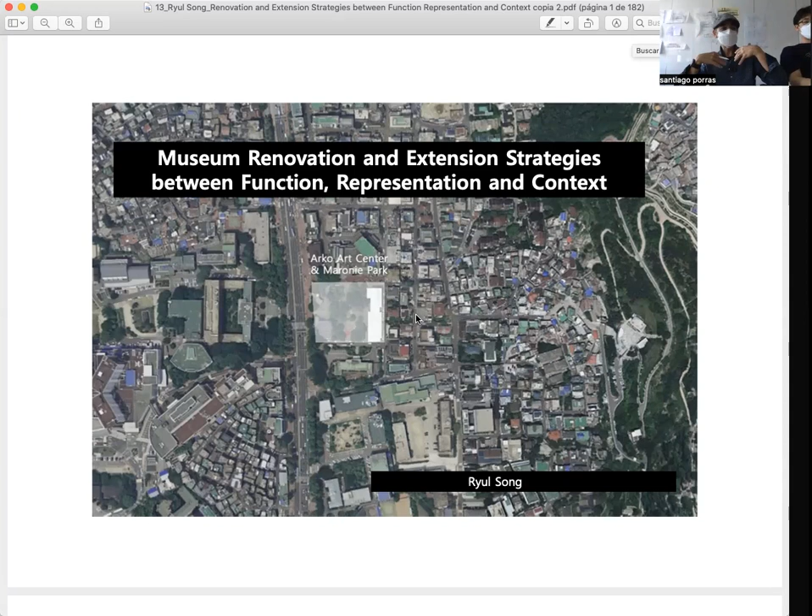So today in building systems, we have the lecture on acoustics, and we had to lock out the microphone of the classroom because it was terrible. It was kind of a big echo and was very much a problem, so I had to go with just plain voice.

This is Professor Ryul Song's lecture. It's the same one from previous years, but we have permission, and it has quite interesting case studies that we will see. I skipped the part in which she analyzed the Arko building because it is not our purpose.

She started with one movie we commented on in class also, Mon Oncle, from 1958, which you see on the right. It's a movie you can find on YouTube or almost anywhere. It's quite interesting because it was made at the moment when France, Paris, was rebuilding from the war, and it's kind of a field of experience for modern architecture. As we commented before, it's very critical of modern architecture.

So this is kind of a comedy, right? But it has a very patent critique of that kind of dream to be very mechanical and modern society. The protagonist is the uncle, the guy with the pipe, and the nephew, who is the son of a rich man making a modern house. Jacques Tati is actually a Russian-French director, so maybe it's Tatischeff originally.

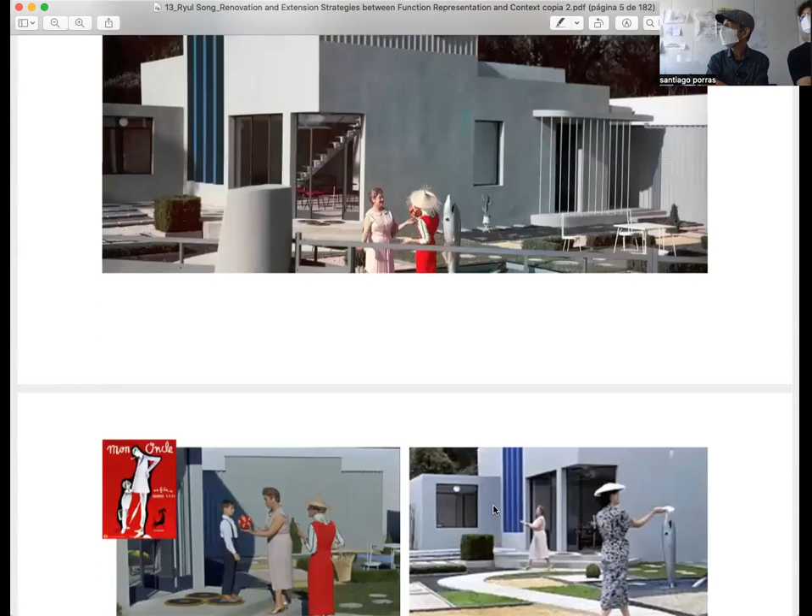And this is the happy couple, right? The housewife and the successful businessman prototype. And as we commented, this is the scene we saw in class, these two ladies crossing the garden to say hello. Yeah, this scene here.

And all the spaces, the life, is very artificial. There's a specific spot in the garden to enjoy the sunshine and have a cup, or the automatic door of the parking, which shuts off, and the dog stays there while the couple look through the windows for somebody to open it again because it's automatic. The dog only has to cross the photoelectric cell, but he never goes there. It's kind of dystopic.

Or the obsession for hygiene, for cleanliness, in which the mom puts on gloves to clean her boy after he's been playing with his friends. If he were eating dirty, cheap street food, they would find out. Then at home, everything is totally sterilized to avoid bacteria. Of course, he has no taste for it, so the kitchen is more like a laboratory than a kitchen.

But what he really enjoys is just going around with his uncle, who has a lot of style. And the old house is totally the opposite, right? You meet the neighbors whenever you go in or out, you meet somebody, you speak. This is something which is kind of lost in our projects - this space from the street to the house, even a tiny courtyard, this place for stopping and meeting.

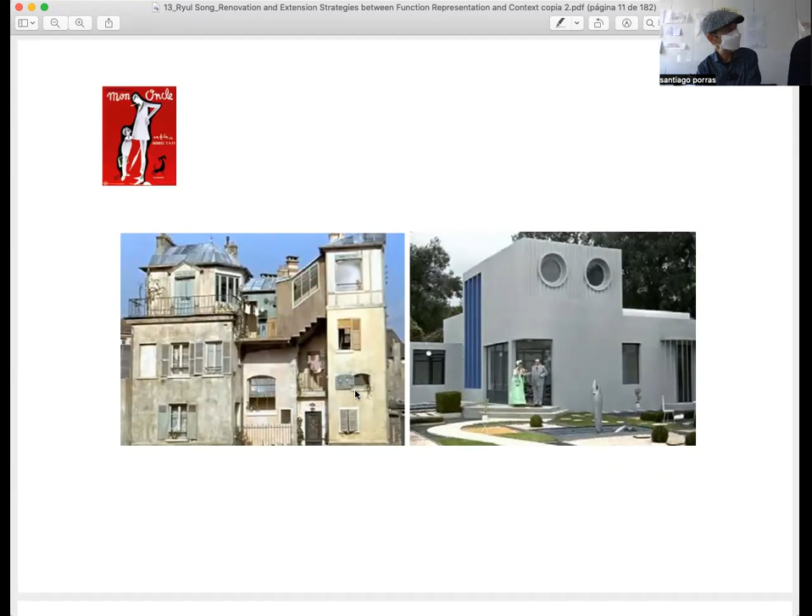And this is the confrontation, right? The old guy with the modern social guy, and the disappearing traditional city against the modern but more impersonal city.

Now let's see a few examples from extensions and reuses. The first one is quite interesting. The idea of the city is that the city itself is a scape, right? It's not a natural landscape, but an urban landscape you are really in.

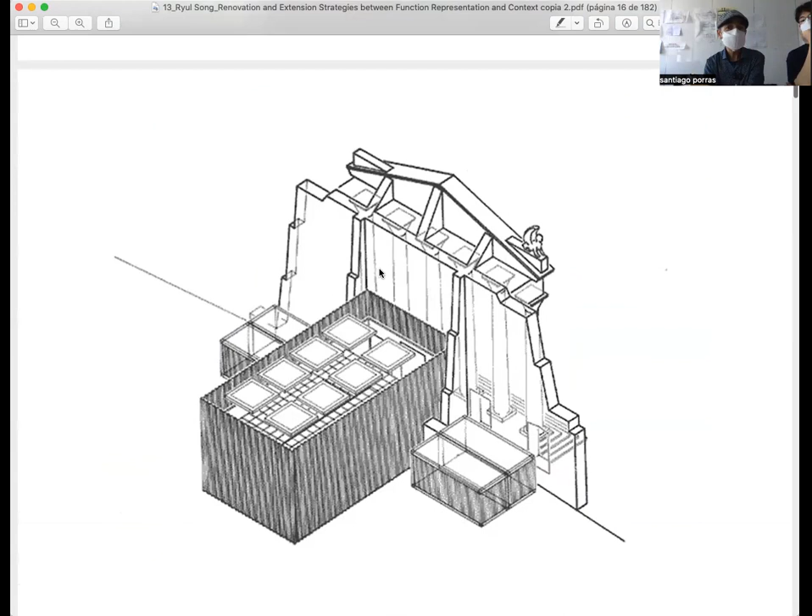This has to do with our requirement to deal with the structures. Facade alone doesn't stand, needs some kind of structural reinforcement so it stands up. Well, this is how it stands in the street. So the context is almost no context. So this is like a very rhetoric in that sense.

It's very much in the Venturi's. We spoke about Venturi before, right? We spoke Robert Venturi, the decorated shed. So he was defending a possibility of making architecture in which you have a plain building which has a sign on top telling, I am a monument. Right, so it's a very famous illustration by Venturi. This is doing the opposite, not telling things, but doing that with a real representational element.

This section, again, there's like a real construction project with all dimensions, the containers to get the functional elements, which is the office and the toilet, a little less, and the really minimalistic exhibition space.

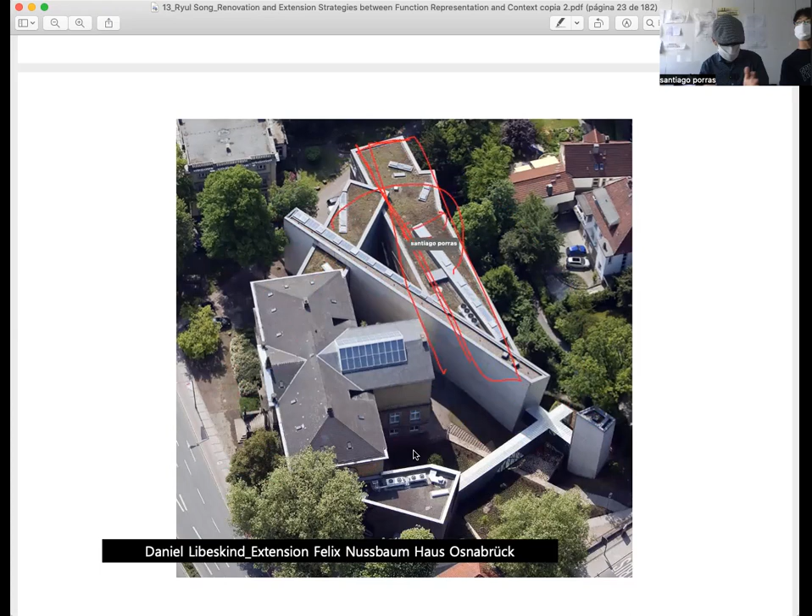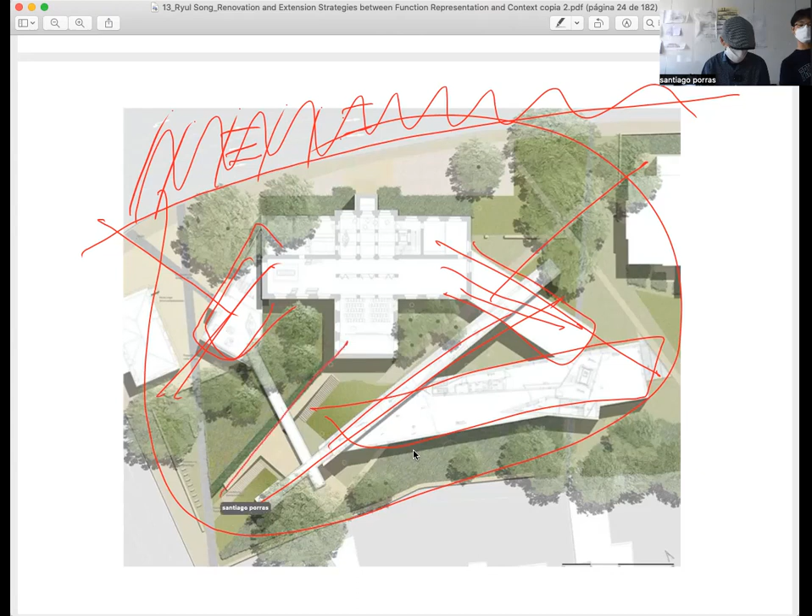And here's when we understand a little bit why things are done like this, right? So like secondary facade to the street, another element to the street. This is a little bit of asymmetry we were criticizing with the sand dune before, but the elements are so different, and then you have many more elements to counterbalance that movement. That's not more asymmetrical achievement, but a set of elements creating a whole, right? And landscape completes this kind of connections or divisions and movement lines.

You see also that the drawing is very subtle, but some of the gestures just go inside the other buildings and become something different, right? So this becomes like one element could be one full building with a courtyard inside, right? Which is following the other one. And then this still could be another building which relates to this other garden. So there is much more elaboration than just a random juxtaposition of boxes around the site.

I wish the conditions weren't so strict, but I wish there was a bit more interaction with the existing building, because this cut is too sharp. This would have worked much better if there was something happening there in which the extension and the existing are a bit more closely related. But probably the conditions were quite strict in this case.

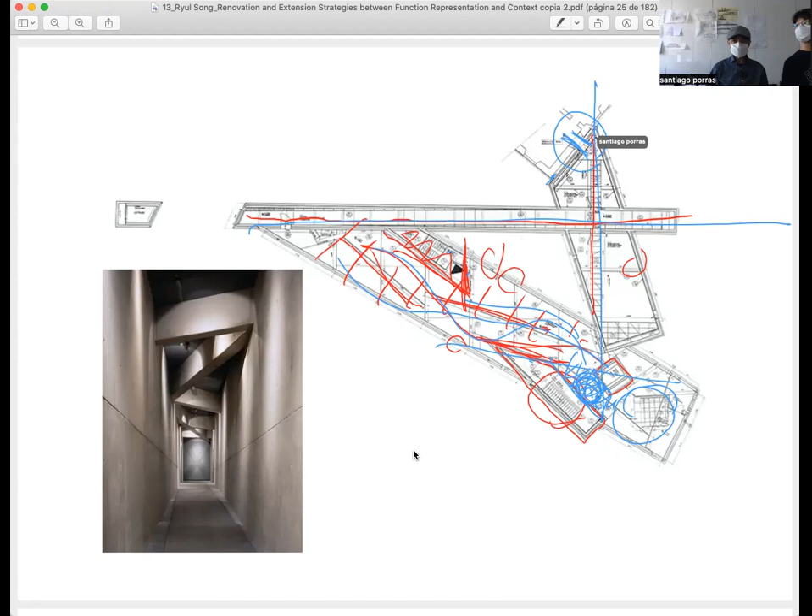And this is the connection with the existing building, which is just putting the doors and one wall against the other. I don't know if we can see this in greater detail, but what we commented - see how there is always a small in-between space between the existing and the connection, and almost a tunnel which goes inside the window. So really the existing building doesn't lose its integrity. It's not like sticking one building straight to the other.

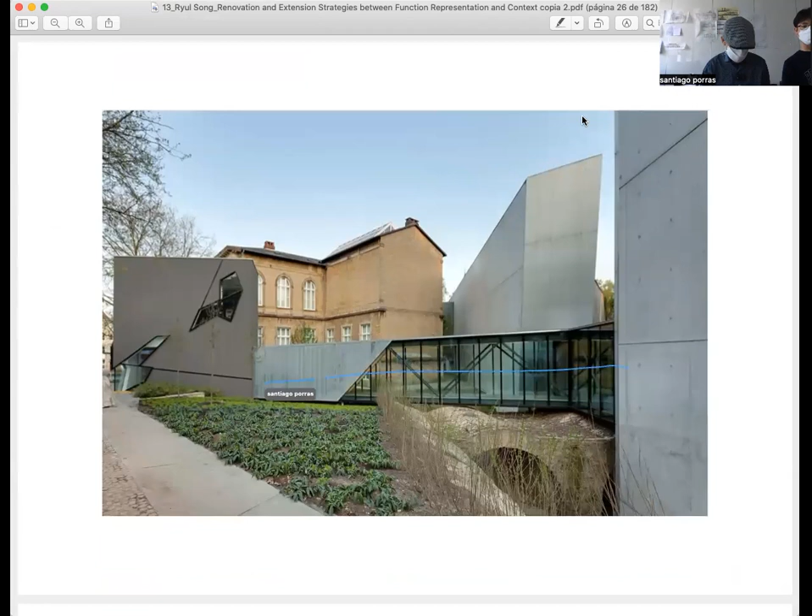All these are the spaces you get inside. This is the long corridor, and this is exterior. So you see some element is just very light. And this is so interesting because in the plan we cannot see it, but if we see the reality, we have very heavy, very solid elements and very light, almost immaterial elements. And this helps also to give some balance to the site. You have some kind of suggestion of what you can see through.

Interestingly, this glass is over kind of ground water running around, some stream under the building. So the view and the flow of water are relating. The building, actually, all building is not great, nothing, but...

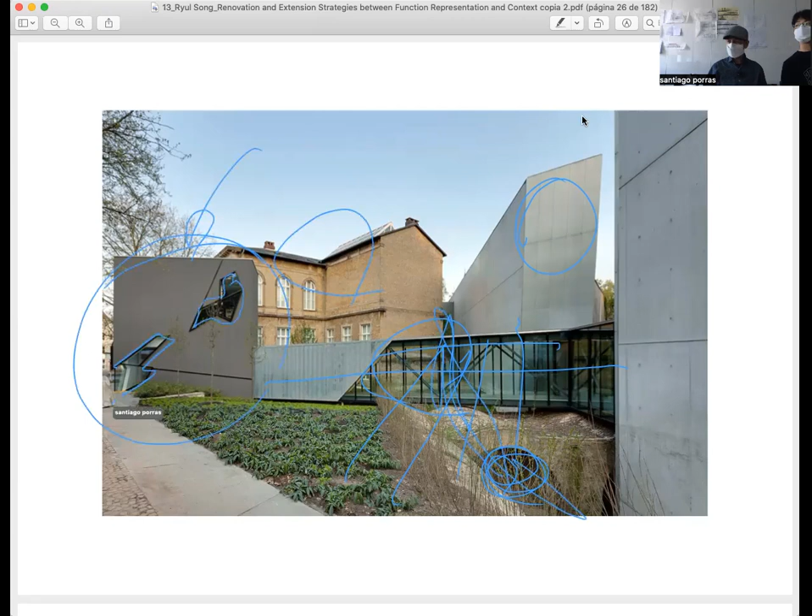Obviously it's not touched, the design I'm not so sure. This piece in the front makes sense at this time, but it's a little bit... well, I'm not sure this is the best of the design. It's obviously getting the geometry you have in plan and putting it in elevation, finding some lines, but at points I doubt it has the strength you see in plan. It's a little bit overdesigned.

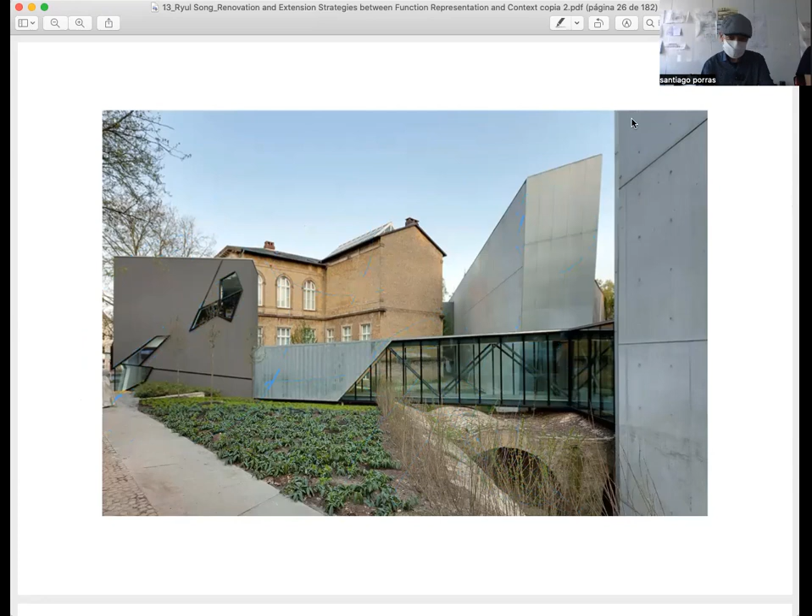Facades are terribly difficult, and it's very easy to be overdoing or underdoing in some areas. I cannot say because I wasn't there, but probably this is the hand of some intern or staff working in the office. The project is very strong and very clear, and this facade is a little bit too much - that specific window. This border is more interesting, but well, that's my opinion.

This is more detail which insists on the importance, the difficulty of connecting new and old in some way. So we should reach, in part of the building, this level of definition, at least by the final stage. Not everywhere because it takes a lot of time, but we should be aware of how thick the elements are, how the structure is, how it moves around, how thin the windows are and where they're positioned against the original ones and so on.

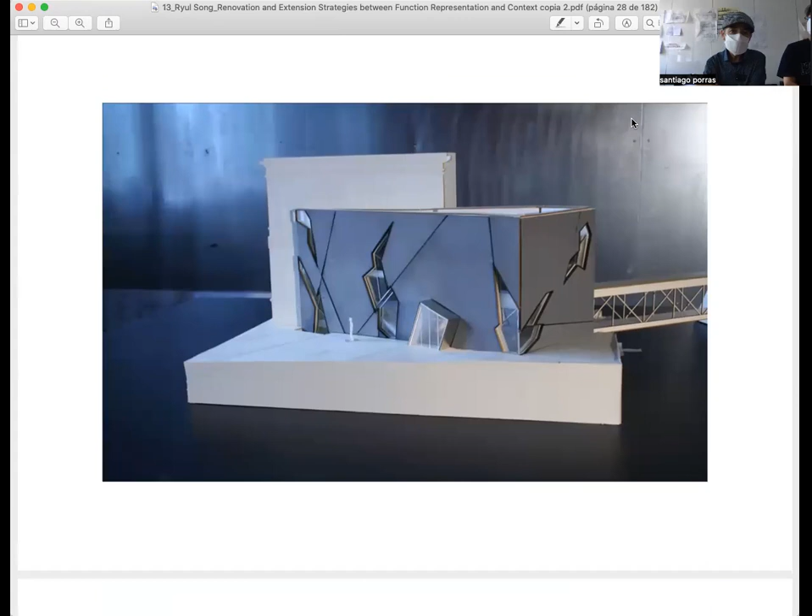Okay, and this is the model. This is where I see like a too much overdoing in the window design of the facade. But okay, it happens only in one building, so it's not kind of repeating.

Yeah, this is interesting, the Enric Miralles. This is the architect who died too young because he worked too much. So do not overwork.

Professor Song worked in his office. She studied with him, so she knows very well.

Miralles is very unique, it's very hard to classify. He's more of an architect than a Libeskind. Libeskind is kind of a sculpture artist, a designer, but Miralles is a real full architect. So all the construction details, the structure, everything is studied in his office. It's not outsourced like it happens with other buildings. Almost everything is tested, and it's very much architectural, very much tectonic. I would classify him more as organic than as a deconstructivist.

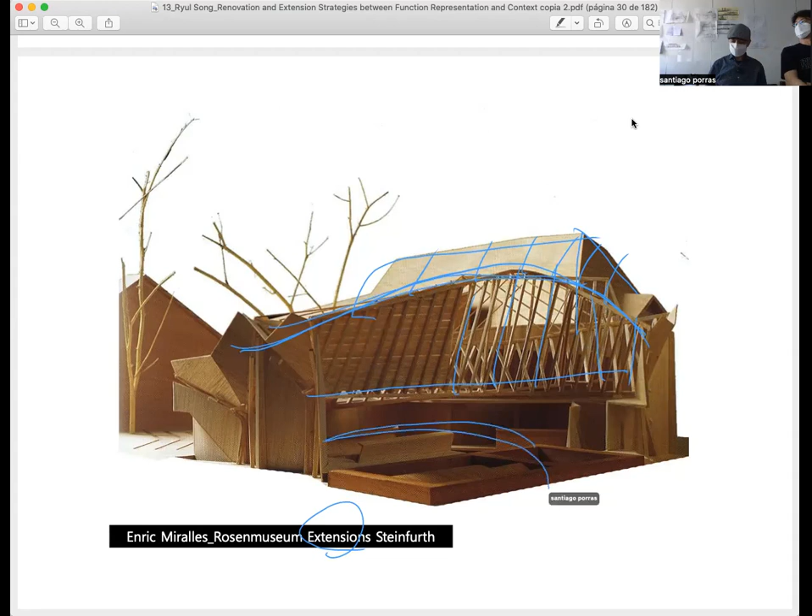This is the plans. See how the existing building, again, is very plain architecture. There's nothing great, right? And the extension is not filling the gap, but just creating some kind of flow between buildings. It's like air or water flowing through, which creates the spaces for the administration or the access and the exhibition elements, which will be piling next to the existing building, creating enough space for those exhibitions. Those two are rotated.

Another interesting thing: the extension is very strong formally, but fits quite well in image and in plan. It's clearly secondary, clearly an extension of the main building. And even if there's some kind of asymmetry, the logic is very easy to follow, at least I think so.

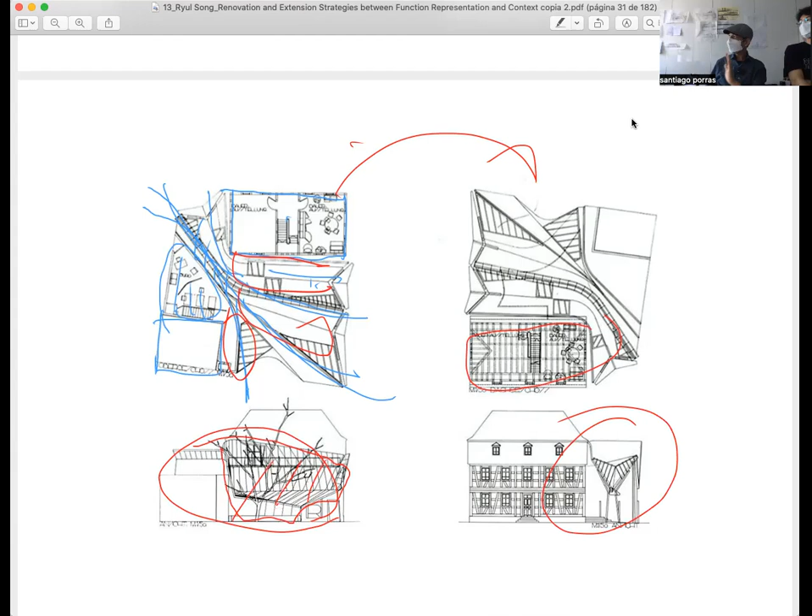It's not easy to achieve this point, because this is already quite a mature Miralles, so he had a lot of experience here.

Well, this is the detail of the plan. When you do this kind of very organic plans, see again the opportunity to make something which is formally recognizable, so you understand you are in a clear space, to leave some space between new and old. Well, this is all new, right?

And then to put furniture and other elements very much following that flow. Very often in this kind of project, furniture and counters really break the idea because they have totally different geometry. A very intelligent way to connect a stair, for example, to give some space to this corner, so we always have minimum space to move around. A good corner was hard also to make, but connects very well this kind of movement around the building.

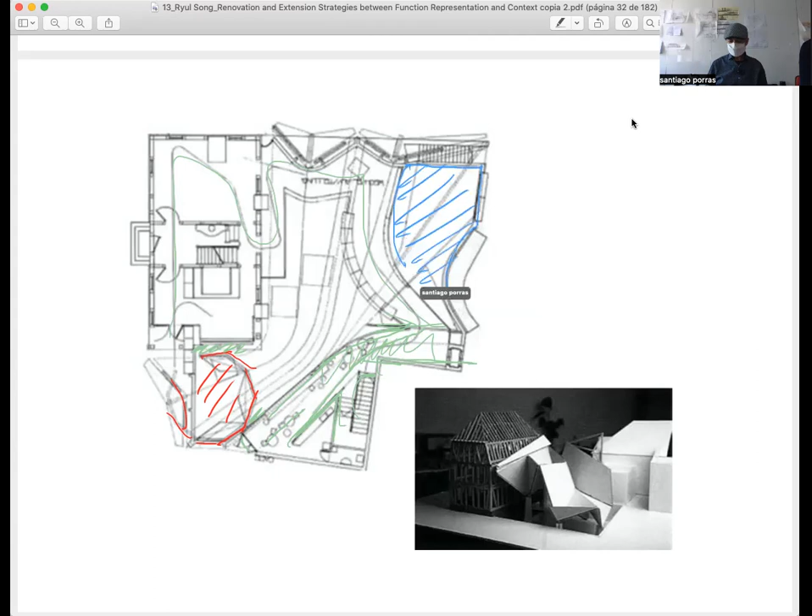And then the spaces created are quite logical. It's not useless exhibition rooms, they are all well organized, with good proportion, and easy to understand as independent rooms, the same as the circulation is easy to understand as circulation.

If you try to do this kind of architecture, which is possible, it takes a lot of work. It's important you still are able to recognize the architectural space within the roof, the structure, the movement element, the rooms, no matter how free you are in the definition. I think a great part of the success of Miralles comes from this being very, very architectural. Whereas Libeskind, well, that project was a good project, but it was much more abstract, more making a sculpture and putting it on the scale of architecture.

Well, this is the model. You don't need to complicate so much, but there is obviously a fascination with this wooden structure and this kind of reinterpretation, a more free way, more like dissolving into something more immaterial towards the forest or the trees.

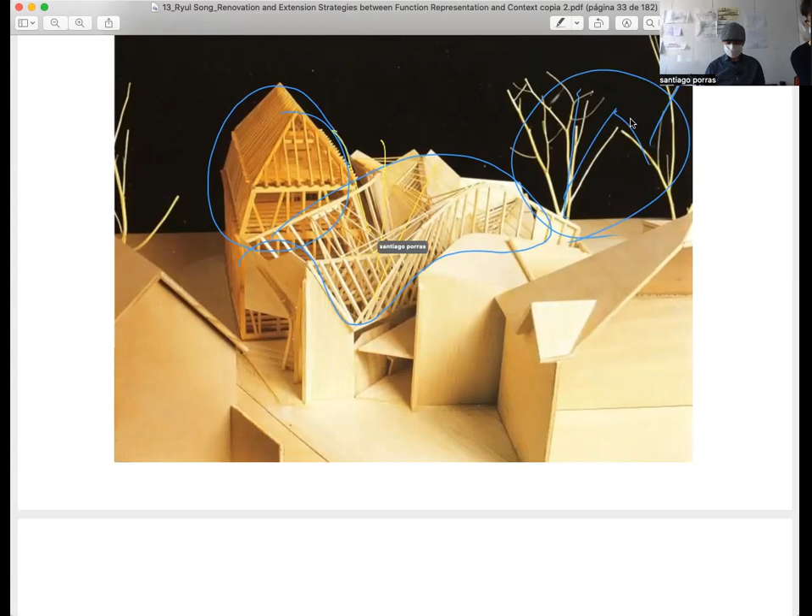And it is important that trees are here because they are also part of the composition. If you see, this roof is kind of following also the logic of the trees behind. But still, they are not an imitation of nature. They have some kind of connection of opening instead of being just a conventional shelter.

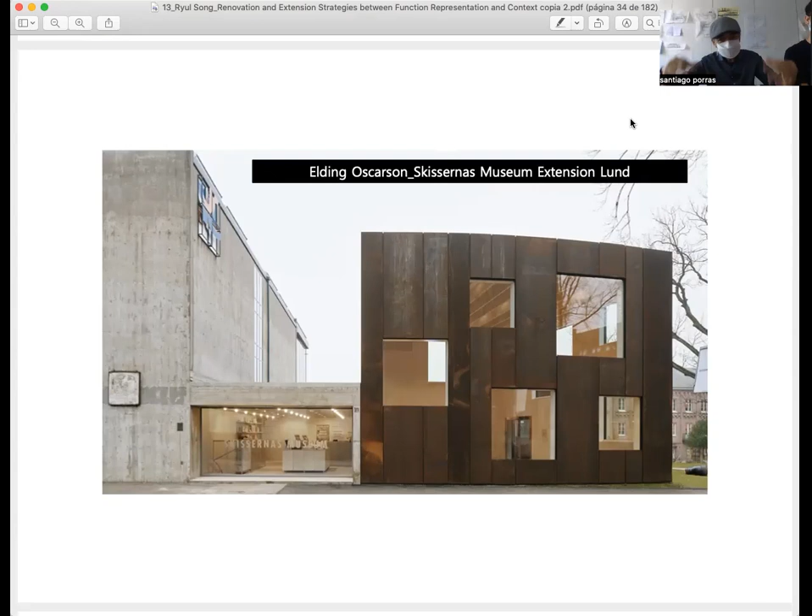Well, it has many readings. This is the Elding Oscarson, the Skissernas Museum extension in Lund. This is a bit more quiet, a bit more down to earth, more like a formal architect construction. This is, of course, one composition which has been repeated over and over - this kind of box with windows, playing with the square shape and the randomness. You can see it in SANAA and many others before, right? But still, this is one element which contrasts with the plainness, the almost industrial character of the rest of the building.

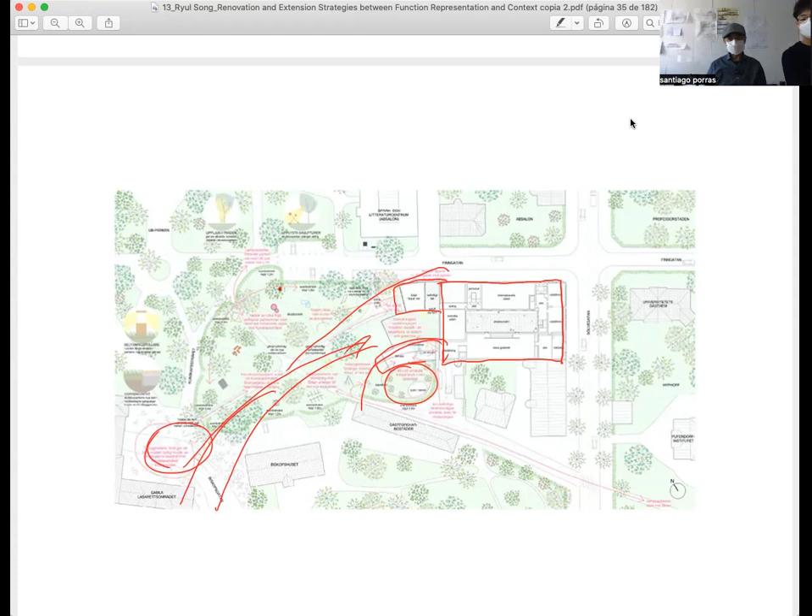What is interesting here, we have a very solid building, and the extensions are like trying to connect to the garden. It's like following this kind of movement towards shifting the center of gravity and ignoring a little bit the other pre-existences there, with the green and the access having a very soft connection with the courtyard inside.

So this is really simple, but very effective. Sometimes we don't need to complicate too much, right? And I think this project, the strongest part is this connection of the garden and the interior courtyard of the building, from which we will understand how all the exhibition spaces are done. I think this is a museum. You see the drawing, so you have clearly one central space and then the courtyard and so on.

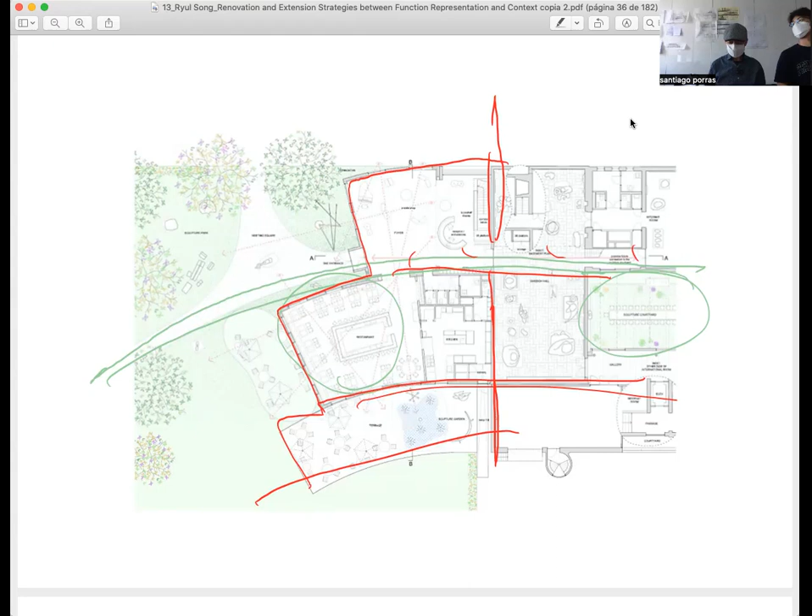The access is a little bit tangential, but this is one trick we have seen very often in recent days. And then the building articulates slowly towards the park. The line is very clear, but still there's some kind of continuity of movement and space design. And this kind of atrium connects to the lobby and the courtyard on the other side - there's small gestures and things going around, which makes sense in the context.

And you see a lot of arrows. This is also planning to have this kind of visual connection to places of the building, but also to the exterior landscape. So when you can see the trees, we can see Bukhansan, or we can see somewhere, you have to really demonstrate you can see it. So you can draw the mountain or the building you see as a reference and express it. Draw it, don't say it, okay? Because if you say it, we don't have the image of it.

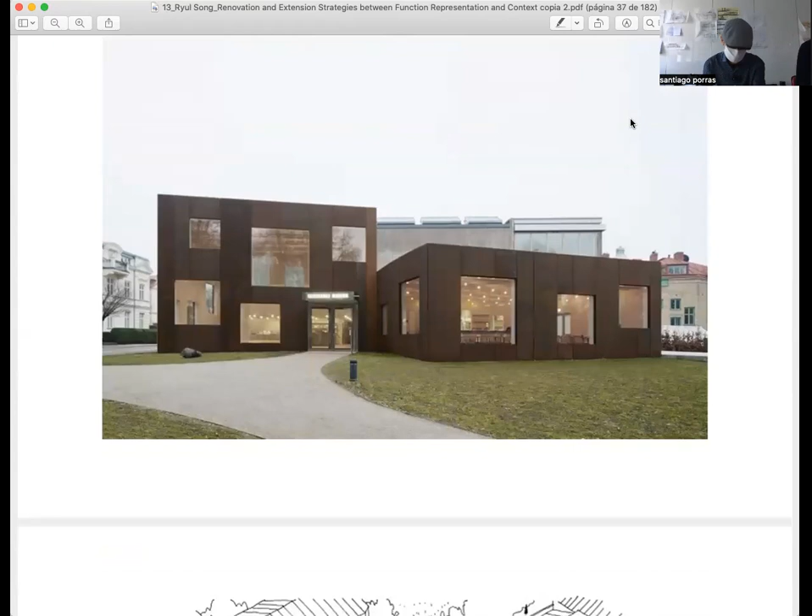What's the extension? You see the character is very different, much more relaxed, not so monumental, but still it has the character of public space. So this entrance, curiously, the door is the size of a window - this is a tiny door for a museum, the smallest you will do in this kind of building. And I see it working because this really shows itself as an extension, as a secondary building, not as the main building itself.

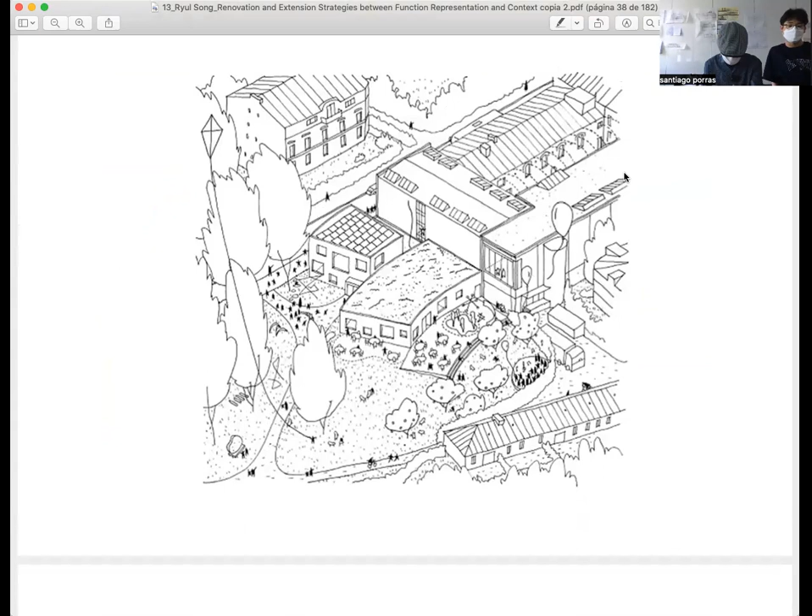Well, nice three-dimensional render. Also, an important thing is the clear inclusion of all the context in the intent, in the design. Something you are trying to do - well, this is not a stage, but many of you are trying to do an external stage. In this case, this fits very naturally in the diagram. It's in the perfect place. It is open, but still quiet. So you could feel one stage - well, this is not a stage, but a stage could work there. It's like a place for staying, while movement is more really through the park, around one tree and so on.

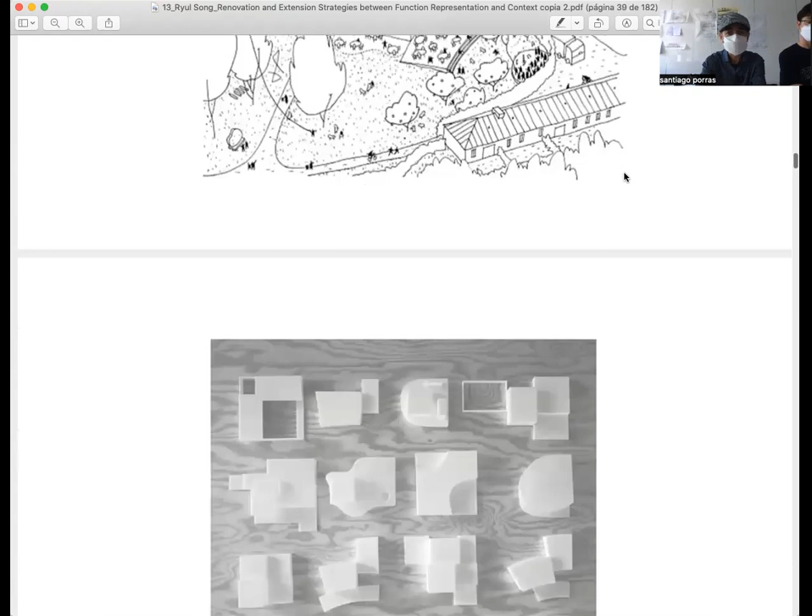You don't need to make a hyper-realistic 3D render to show one idea. Sometimes it's better to be more simple and tell a clear story without losing so much time with the details. Well, this is the massings - I will pass over it. And then the extension with existing buildings, in which again the thing is very plain. You put glass between the existing and the extension, and then you create something totally new with another intention.

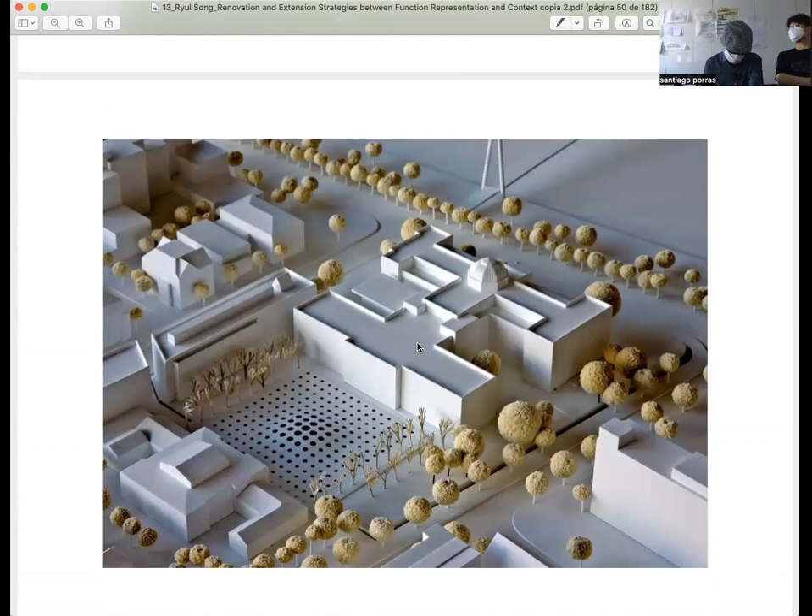One thing which is interesting is this side extension, this kind of diagonal cut, just to point to one open space. Those gestures always have some motivation—it's not something instantly thought.

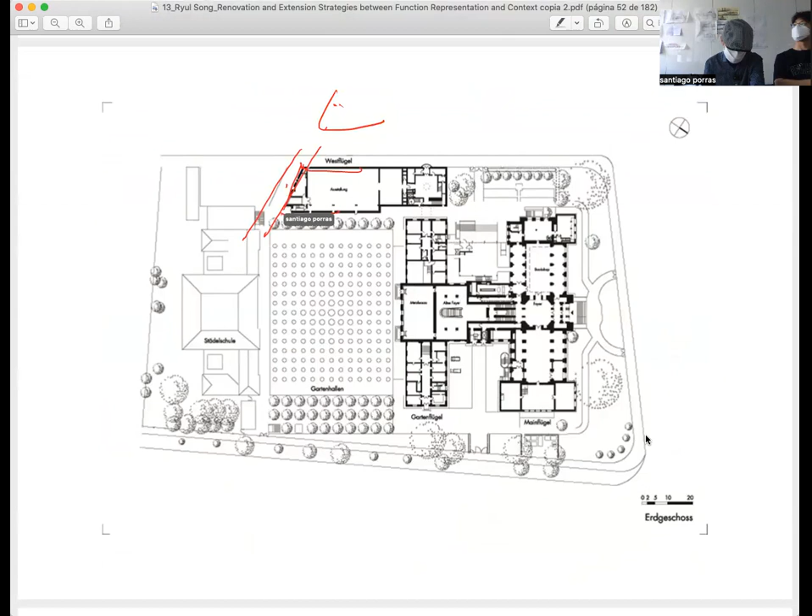The plan is interesting—you see again this cut here. You understand it with the context, right? If we see this alone, it's not clear why you need exactly this angle. But in the model we saw there's an open space there where you can see this garden, and you can see the other garden from the building.

See also how the extension is not as clearly defined as in Moneo, which we saw on Tuesday, but there's this kind of hinge element which at least formally connects the existing building with the extension, with a lobby in between. So it's kind of an element which allows for stopping and rotating to the other side. And of course, we have the original building, the lobby, this kind of backbone, and so on.

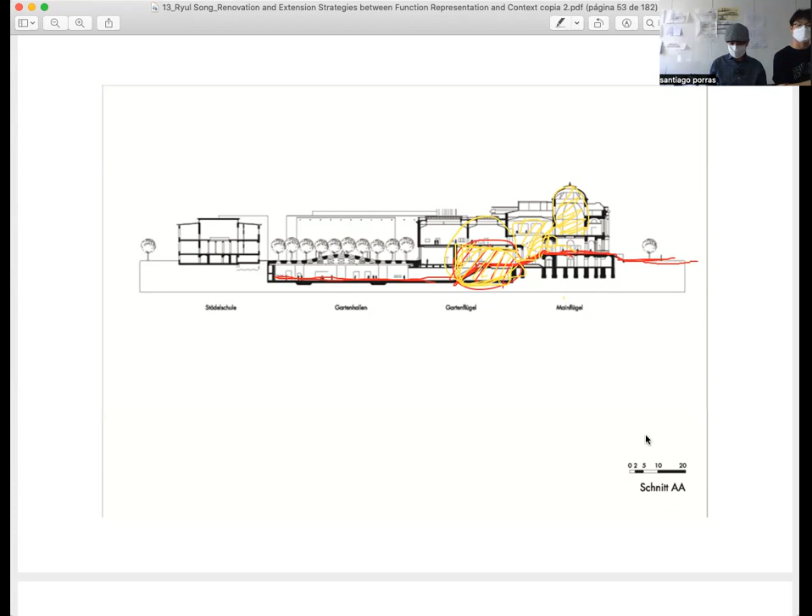And then the underground is one single space. When it is divided with walls, which you need for the museum, it loses a little bit of the attractiveness—this should have been like a small sports court or an indoor swimming pool more than an exhibition space.

Nice as it is, well, this is the stair. It should be like a really inspiring, pleasant stair with a lobby big enough to inspire you going underground. But as a museum, well, it's not criticizing it, it is a museum—but probably this space is too nice to be divided by exhibition panels.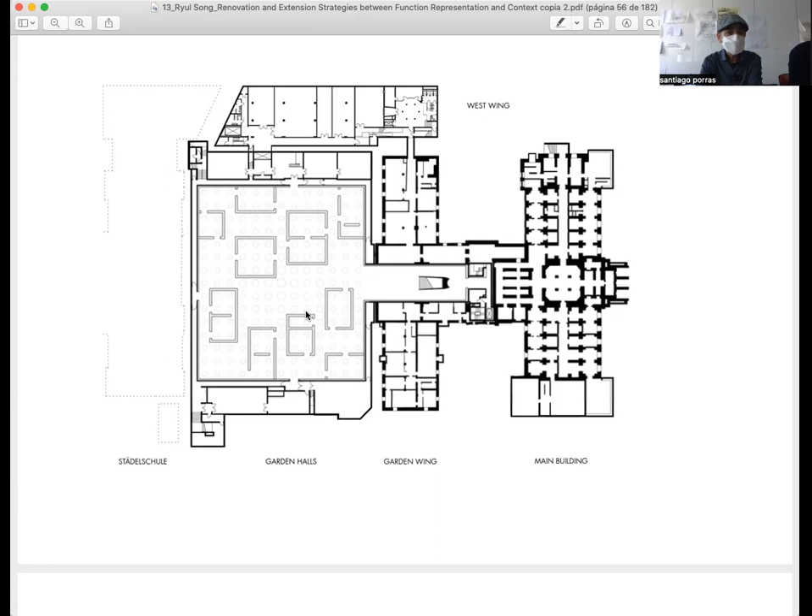So the plan, actually the plan is very good. The scale of the exhibition elements and the spaces in between is very well balanced. Even the logic of going around in diagonal movement can surely be changed temporarily with different exhibitions. So this is a good plan for an exhibition, but...

This space being unified and used only at once would have been great. There's a detail, so the space is nice.

Zumthor's Kolumba Museum is one of the most popular case studies we have. We have a huge lot of slides, so we're at 59 of 182, so we cannot see so much detail. But what is interesting here is the apparent simplicity of the whole idea of the building, combined with a very sophisticated study of materials, light, circulation, and the spaces which are created.

This is Mr. Zumthor's work, and this is the building. Actually, if you don't go to the site, it's very hard to appreciate, because it looks like a very massive, bulky, and kind of industrial structure. But it is mostly the ruins of a church, as happened with many buildings destroyed after the war, with a new building at the top.

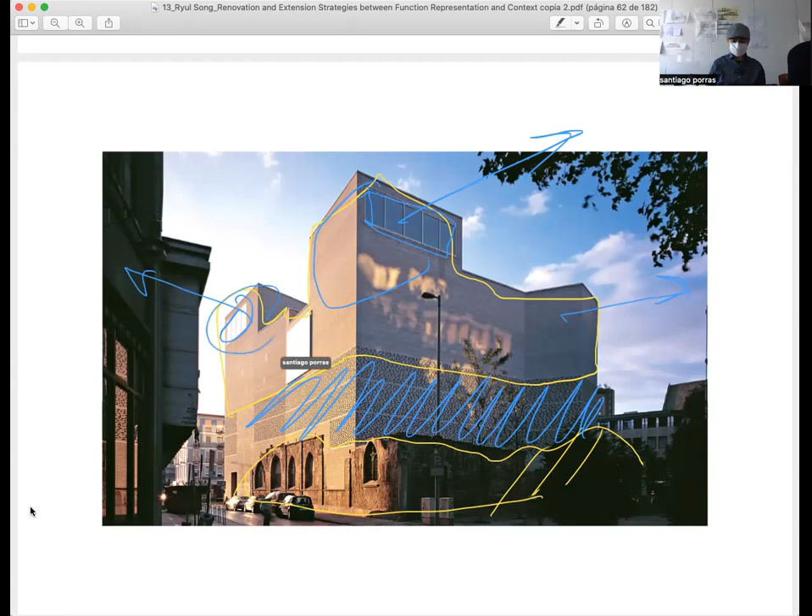So this is actually not such a massive building, with some in-between space which is just a void. The atrium we see very often between the original and extension, but in this case it's done vertically, which I think is the originality and strength of this project. The windows are purposely very industrial and personal, like big rooms looking for views in different directions, and it's so well expressed. It's like several heads looking around, like surveillance towers.

This is the original church, the destruction, then how it was used. Actually, this was one extension, which would also be an interesting case study. This is Gottfried Böhm, who we saw before. Böhm did many churches, and he rebuilt a small chapel, working with the ruins to make a kind of romantic small church within the ruins. Zumthor just kept all the layers of history in the extension he did later.

This is the huge Cologne Cathedral we saw the other day. This is one of the models - I don't think this is the final one. I think these are different proposals from the competition, not Zumthor's. But there was difficulty making an addition and keeping the ruins.

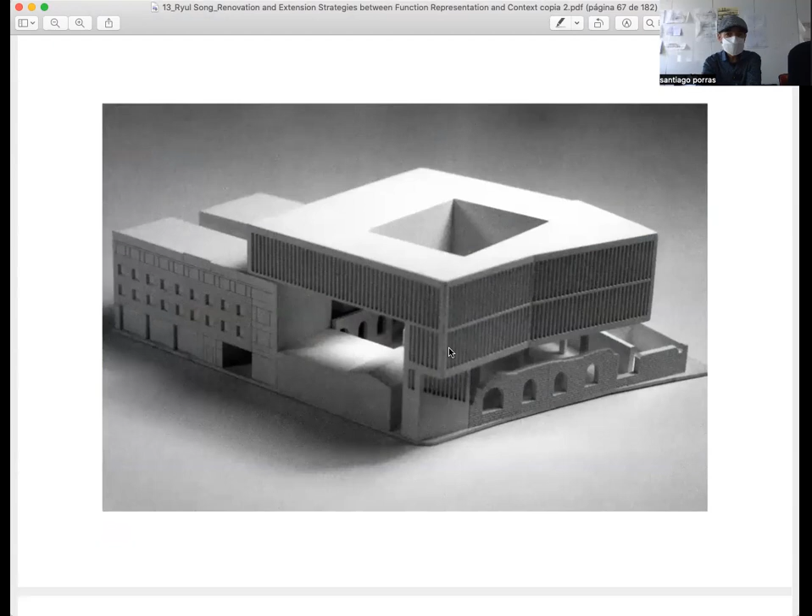This is surely another element of the competition. Very nice building with a very clear division between new and old. But probably Zumthor was the most radical, creating a unity between the new and old, being more radical but still following this idea of creating a layer in between - not being as obvious as the other proposals.

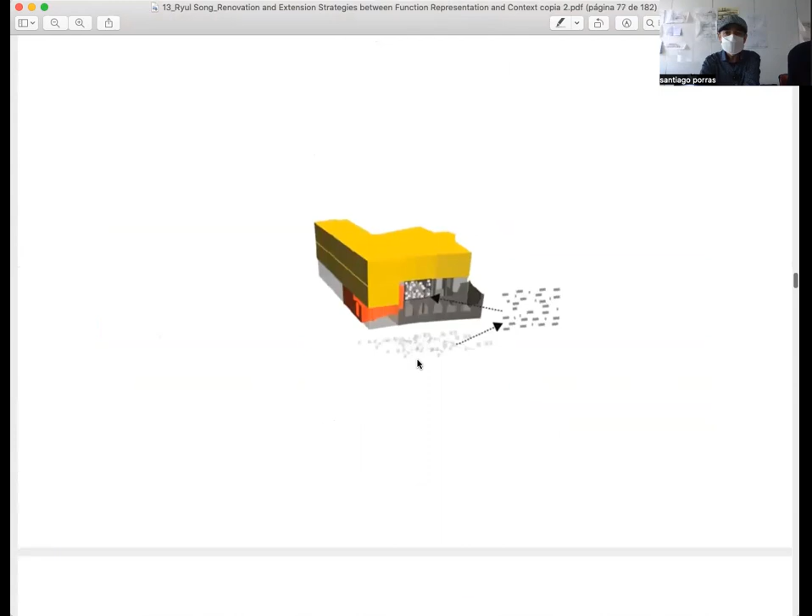So this is the concept diagrams. I won't go into them in detail, but you may use similar diagrams to show your process. You put in a big box, add diagonal circulation, create the program on top - this is the building floating with the space in between. Then creating the directionality, adding the floors and layers, putting in these kind of 4 towers to look for the views over the landscape.

And again, what we saw in the previous project - if you open windows for specific views, show it. This is one way of showing it. Find strategies to show things so we can believe you and understand much better what you are doing in your project.

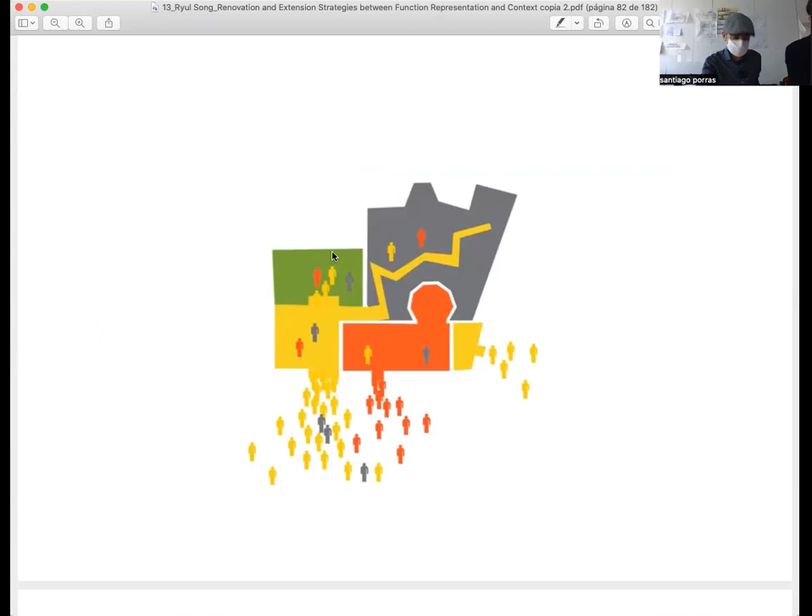Then of course the city circulation - actually I don't think those sketches are from Zumthor's office, I don't know who did this. And finally you have the original movement layer, then the ruins and the green. So there is a connection of everything, but the religious element is preserved totally independent, and the museum has a kind of zigzag circulation through the ruins.

This is very close to Sverre Fehn's Hedmark Museum, in another way - this kind of zigzag, wandering around the ruins. And interestingly, one connection to a hidden courtyard, which is also one of the elements we are dealing with in our project. We have the back garden, or we may have several if we design them that way.

So it's a very clear diagram - this is like the minimizing of elements and the symbolism of that. The ruins, the celebration space, and then the exhibition, the history, the museum itself.

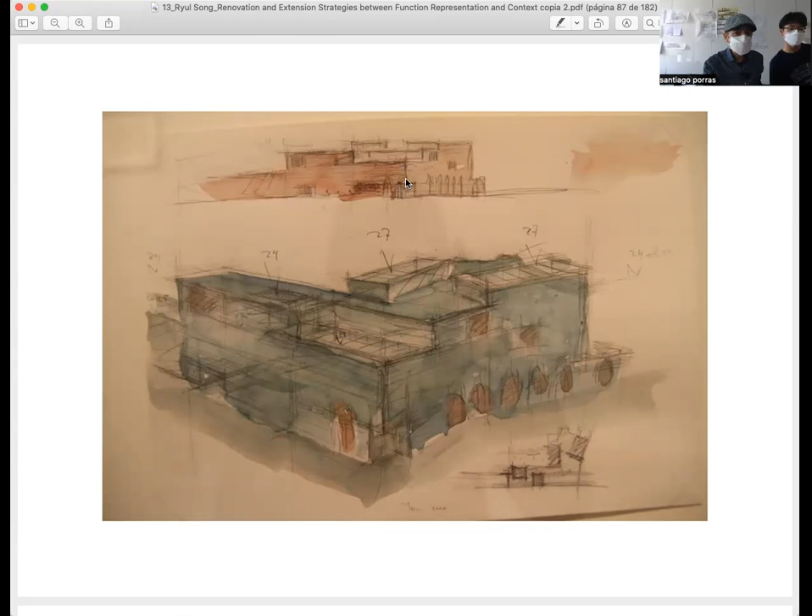Nice sketches, it's nice to see those drawings. This is quite probably an advanced stage of the design, but it's nice to see the thinking process. You see the plan sketched in pencil, the three-dimensional element, the elevation - actually a diagonal elevation from the corner, to help guess how the building is.

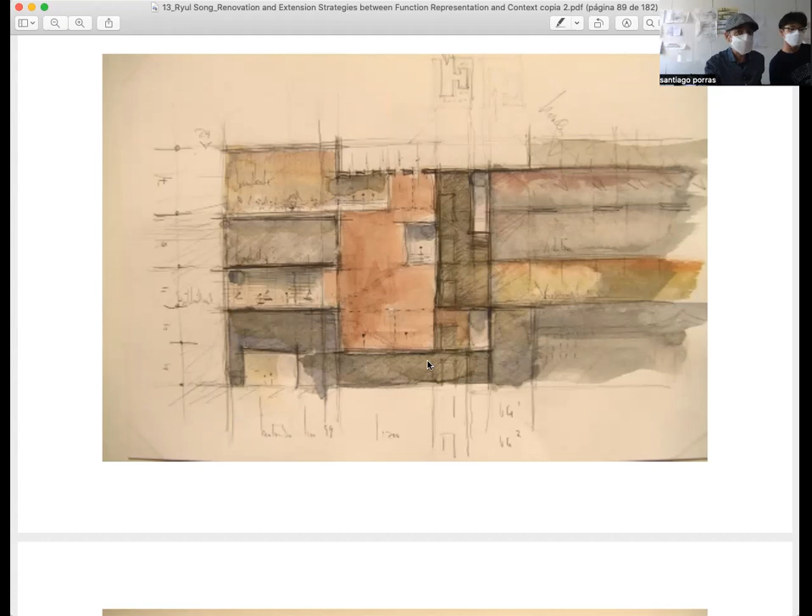So there is a lot of studies - things do not come instantly. Even for people with that kind of long experience and expertise, things take thinking, seeking alternatives, checking, correcting, and making things better and better each step. Which is not doing one thing and then doing another different thing - it's following this idea and little by little finding the best solution.

Floor plan in very much Zumthor style, but with all the ruins there. There's the Gottfried Böhm renovation of the church and the museum, which is actually very much Zumthorish, right? You have a wandering entrance, and you keep discovering spaces. You go into the ruins, or you go into the garden, but yet see space by space. You have a long and narrow entrance, but huge, very much in scale with a huge building where you need a huge door, right?

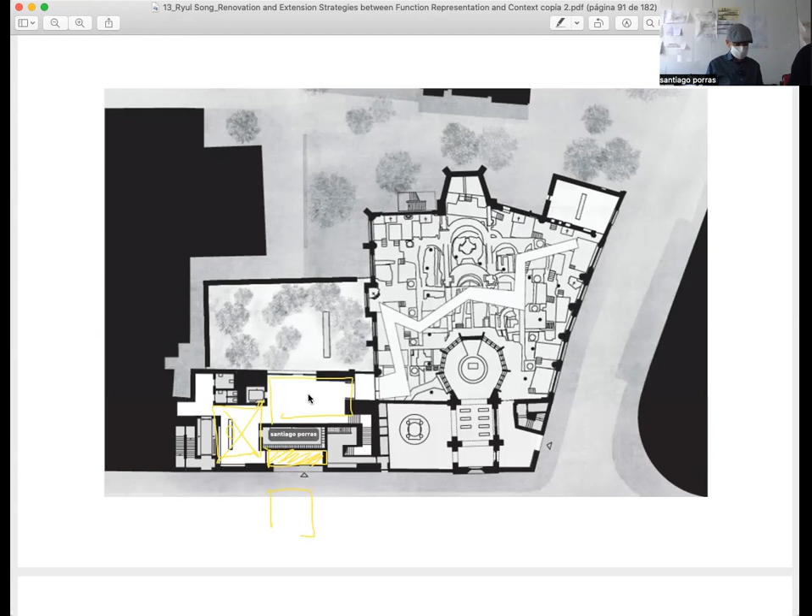Then you have the entrance with probably the reception desk. Then you have one main space, which is larger, right? Then the courtyard or the access to the wandering space to the ruins, right? And all those transition spaces are smaller than the exhibition spaces inside, right? And the courtyard has right the scale of the added volume here, right?

So you go narrow, large spaces, but this is quite cozy, quite controlled space. I don't know if this wall existed, was done, but if it was open, it would be like a too diffuse exit to the rest of the park, right? So there's a very nice transition between the small, the medium, and then the large exhibition, right? It's like a sequence of 3 or 4 different scales.

Well, again, this is a set of floor plans and sections in which you can spend hours looking for small composition tricks and ideas on how to make those elevators, those toilets, those stairs working naturally within the space.

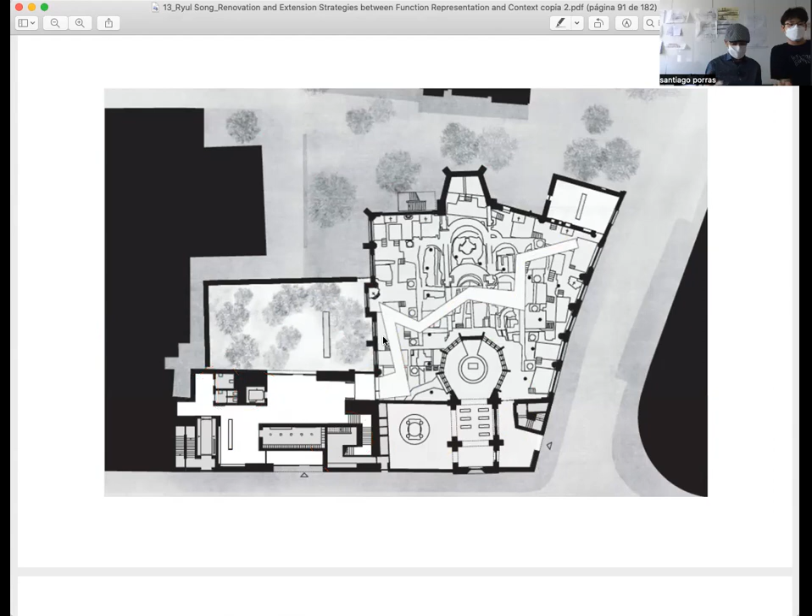Okay, see how you go tangentially to the stair or tangentially to one exit, right? Or how you go in the opposite direction to the toilets, but you have a totally independent lobby, and you will never see the doors, but you will understand this is the toilet space and so on, right? So everything is so carefully planned here that there are plenty of things you can take for your repertoire.

Section, the same, no details, just this is very clear, right? So the section demonstrates the building is not as massive, not as aggressive as it looks from the exterior, which is rather protecting and creating a very mysterious space in between.

Wow, also a beautiful section. This is all new building, but see how many different scales you have, depending on where you have views or important spaces. This is one of the lounges for taking rest, right?

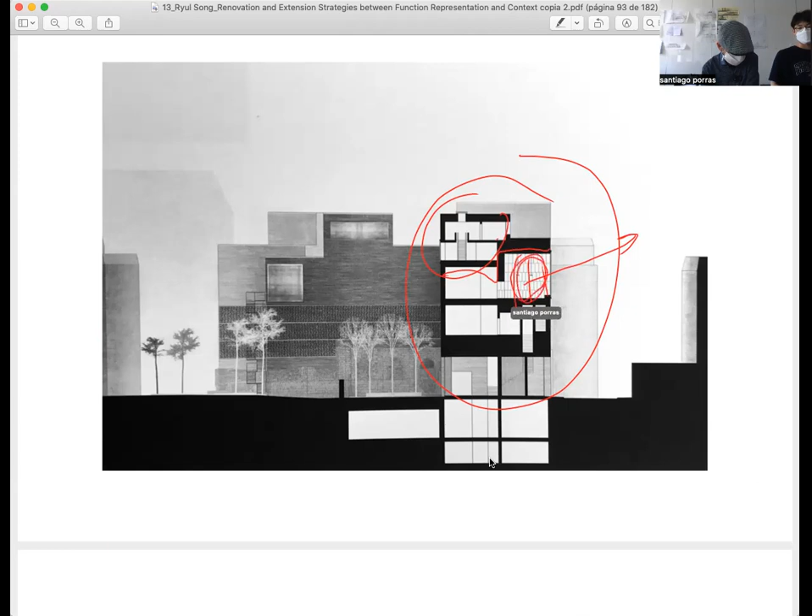Also, minimalistic but very well done facades. Again, put your sketch paper over this and learn to do this kind of change of material, texture, position of windows and proportions. So you get accustomed to those proportions, those shapes, and this way of composing elements.

Well, more sections, stair. Again, you can see such a variety of spaces, even though this is very much a casual section, right? The section through the elevator is always mandatory, but it's not one of the most flattering in the projects. However,

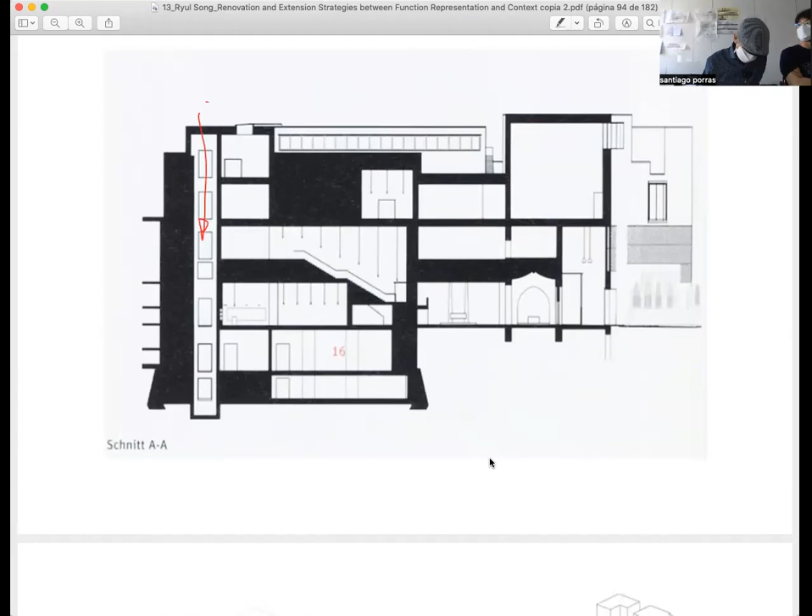Then 3-dimensional study, this is circulation. One thing which I think is worth mentioning is the simplicity of the circulation, right? You have very clear elements up to the way. There's not much labyrinth there. The circulations are quite clear. Not too simple, but quite clear.

Well, facades as we commented. And the final building. This is the problem of not putting a big enough dripper in the windows. Okay, we have to.

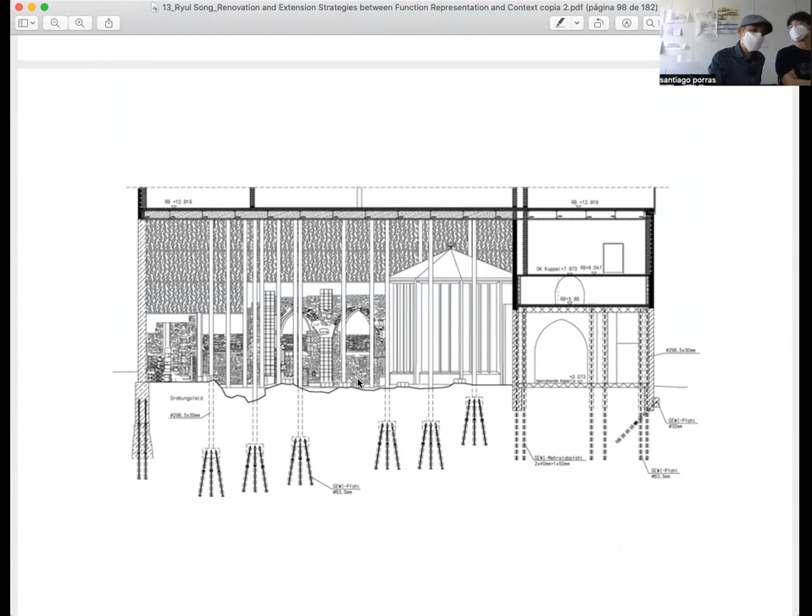Okay, the construction: there are micro piles to make the building without touching the existing structure. This is the plan of the micro piles to be able to build on height without destroying anything of the existing building. We don't need to go so far, but when you are going to excavate in the existing building or do something on top of it, we also have to decide which technique you will use for that. And this year we don't have to do it. You don't need to do it, but if you excavate under or you build over without touching things, you need to decide how this will be done.

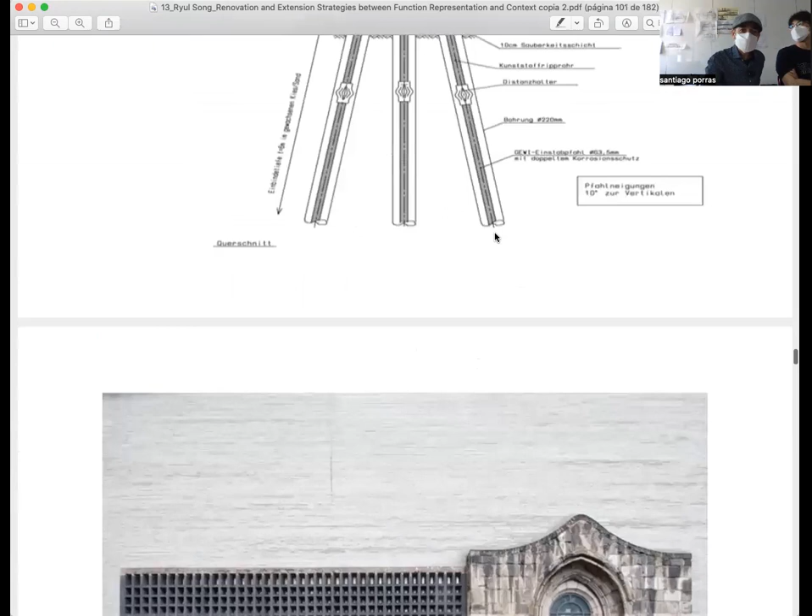All this is technical drawings, how this is done. And then again, the combination of existing elements with the new ones, very elaborate. This is new, this is modern, but it's very elaborate just to have some kind of counterpoint to the other elements, right? Telling, okay, this is precious, but we can do also precious elements in another style without destroying it. It can be assemblies, and all that needs a lot of neutral ground.

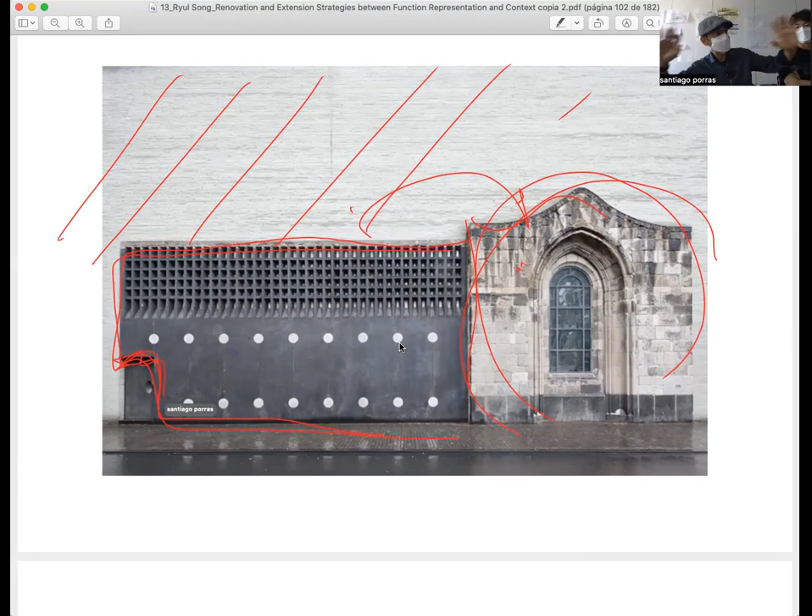They don't need to fill it with many things, because very few elements remain. We put some precious, more functional entrance next to it, and then just a big, huge, neutral canvas to hold all those gestures. This is the famous porous facade.

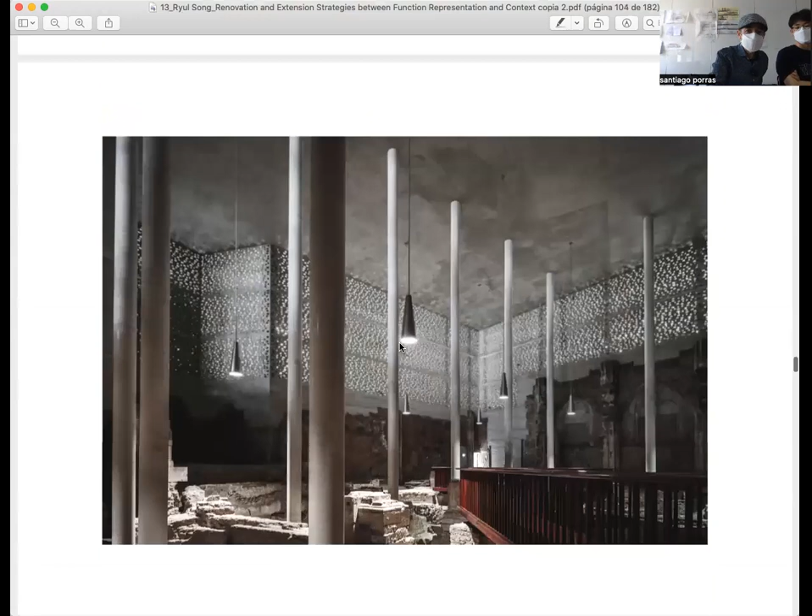It has become trendy and everybody wants to build it, but it's really hard to make, still a possibility. Here, the merit is to make it look kind of random, kind of decomposing, pixelated, a vaporous solid facade, which creates a very mystic, soft lit interior. This is photos of the construction, and then the finished museum with this contrast between very lit, very clear rooms and very dark rooms.

This is a museum, but in any kind of public building where you want to create many sensations, like a reflection, healing center, or meditation space, this kind of variation of spaces, scale, light, character, you could have inspiration or examples on how this is done in many buildings. You don't need to always have a huge window to the south or whatever. There's only one possibility among many.

Well, stairs again, minimalistic, as Zumthor likes, and very careful connections between different materials. The detailing is minimalistic, but still very logical in the way we use elements, and almost all materials you can imagine: metal, concrete, stone, wood, precious root wood, and so on.

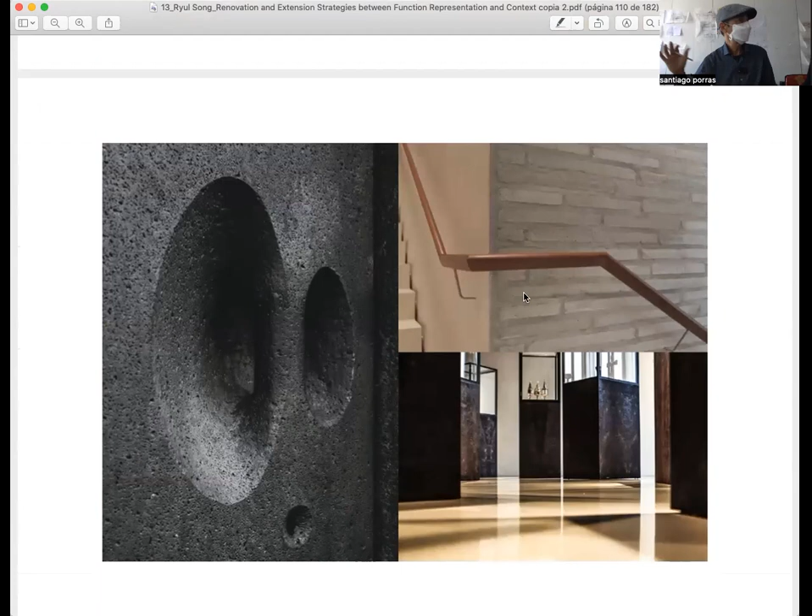This is a door of stone. In terms of experimenting with materials, this is one building in which almost no material is untouched, but yet it's not a noisy building. The scale helps, but also the care where the change of material is done, and the detailing is very logical.

Well, simple lettering and... wow, this is the room we saw before. There's kind of a huge volume we saw in the section with the observatory towards the city. This is clearly a rested space.

Just the simplicity of making a huge window and then making the walls with real timber, so you have that texture of timber in a building which is mostly bricks, stone, and concrete, and very cold. So you feel like being in a really cozy, luxurious place with those huge curtains, not a plastic sticker imitating wood.

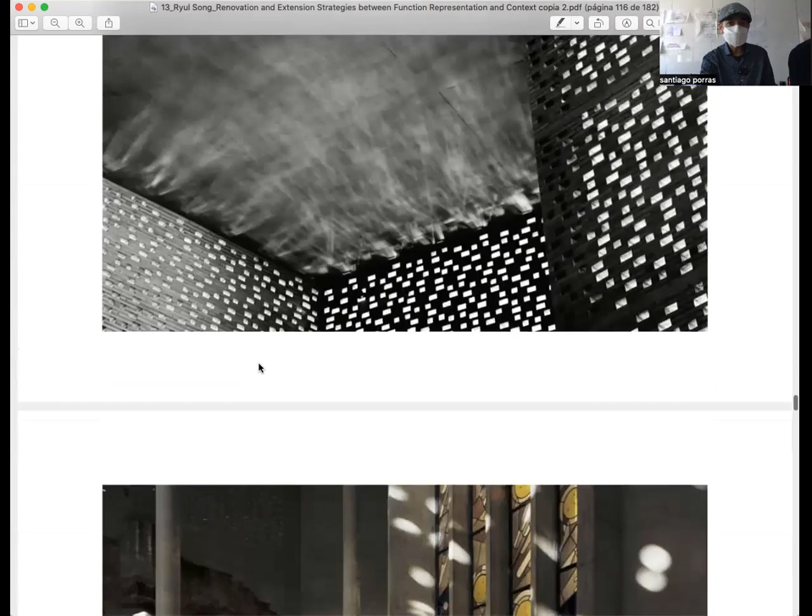And the endless effects of light. It's kind of interesting: because we have the experience when light goes through many small holes, it actually happens like a small photo camera. If the sunshine hits directly on that facade, you will see the circle of the sunshine repeated through the holes. If there's a sun eclipse, you will see the moon shape in this kind of projection.

This also happens under tree leaves. You will see those small circles, which is really a projection of the shape of the sunshine through the small slits of the leaves. This is why this is so interesting. You see, this is the round sunshine, the camera projection of the sunshine's roundness.

Well, existing and new, integrated furniture, and locker room. Locker rooms can be nice also. Yes, lockers. And this is the exit to the back courtyard. This is the wall we saw before, which lets you see the view of the buildings.

Again, trees are important as the intermediate layer, but it fits very well next to this lobby. See the simplicity of the window, the door. You see the size of the building; this door may probably be 3 meters high. It's not the standard 2.03 meters.

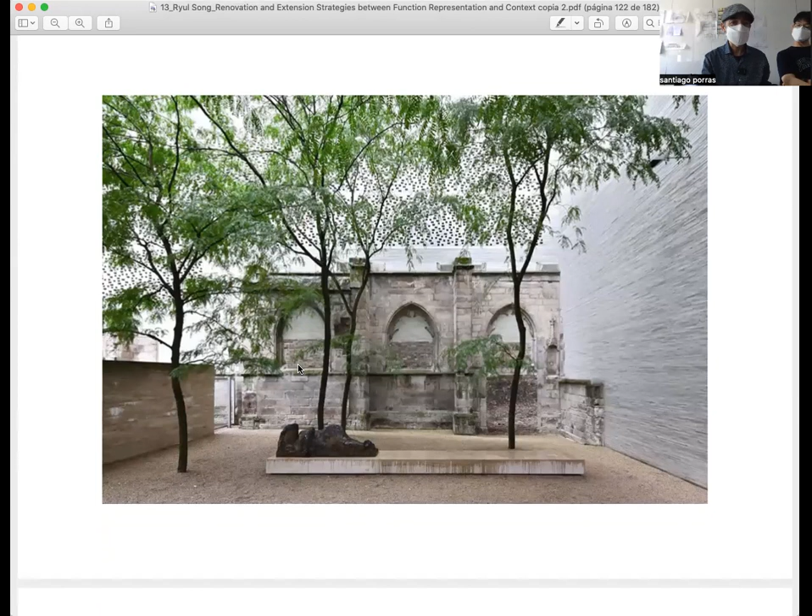The courtyard is really a nice space. Everything is very much proportioned. We could speak and comment on every little detail, same with the kinds of materials outside, back to the street, and so on.

After that is an architect's Franciscan Education Center in Seoul. This is near Deoksugung.

It's actually a nice building. It's tough seeing this after Zumthor, right? Because that's a good project, but okay. The existing building is not such a great building, but the Franciscans have some tradition and they wanted to keep it.

That's reasonable. The extension is clearly a minimalistic glass box. Here we have the difficulty of making glass boxes elegantly fit the existing building. I'm not sure the building performs very well thermally or in terms of light, but that's what design is—it's quite elegant, and it's a good project.

So this is the existing building. Actually, with the renovation, it became better, which is a good thing, right? We always try to improve things to enhance what already exists.

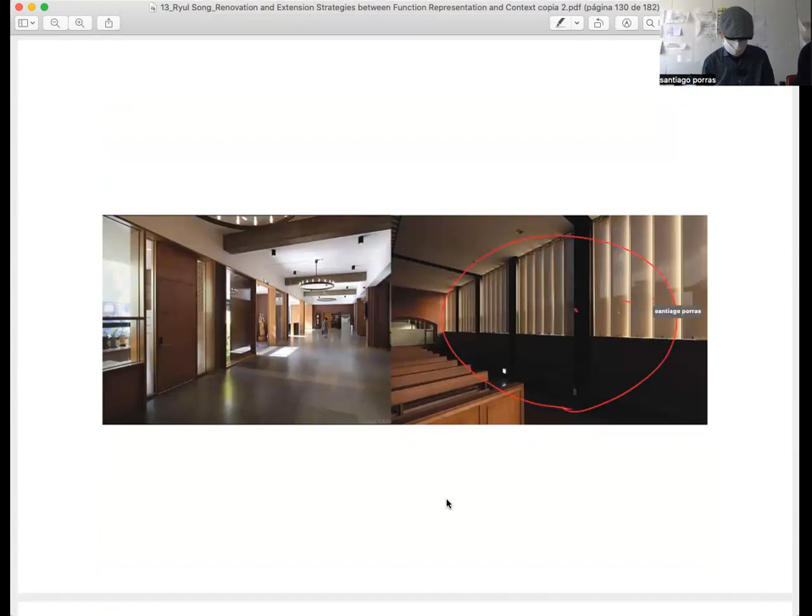This is the two guys, and this is the photo as it was published. The special, interesting thing is this new facade, which clearly has a lot of light control, with a very simple structure. And this additional dot creates this kind of monumental space. Again, the details are very simple, and this is one of the virtues of this project.

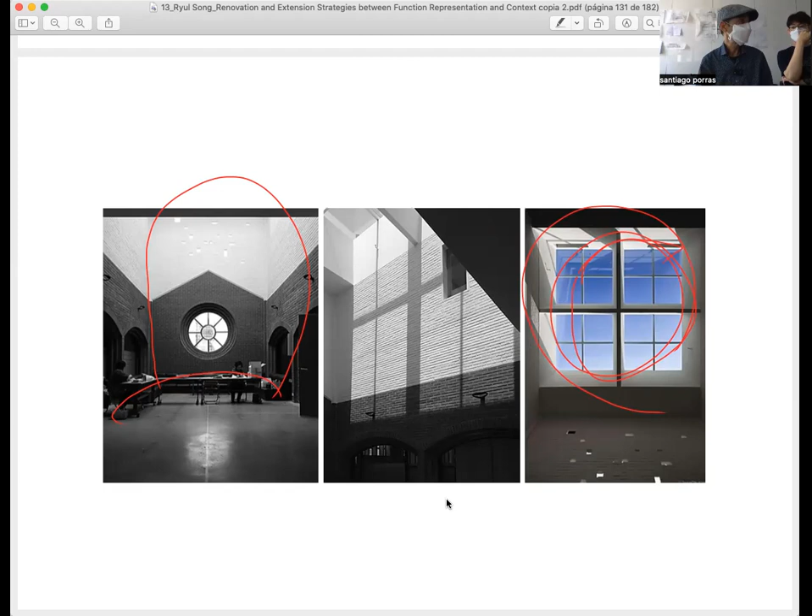This is a top window, which again is very deep in section. I'm not sure how this space works in summer—surely they have some way of shading. Making such a huge horizontal window in glass is kind of suicidal, but it looks nice. Okay, then it has elements, a new stair. Okay, but no.

Herzog & de Meuron, Tate Modern. I think it's one of the last projects here. It's a huge project, interesting because it is on the huge side of the scale. Very industrial building. I think the positive gesture of Herzog & de Meuron is keeping that huge monumental space as a kind of interior space which is almost like an exterior space, in terms of scale.

The whole entrance is a ramp going to the main exhibition space. At this scale, it works very well because it's a little bit like this unusual experience of going down in a soft slope. It happens in the Pompidou Center too—it's a kind of connection with other cultural facilities.

All those guys, huge building. The back is the second extension, which is controversial—some people love it, some people hate it. I have to go and see it; I was not there to give my final opinion on it.

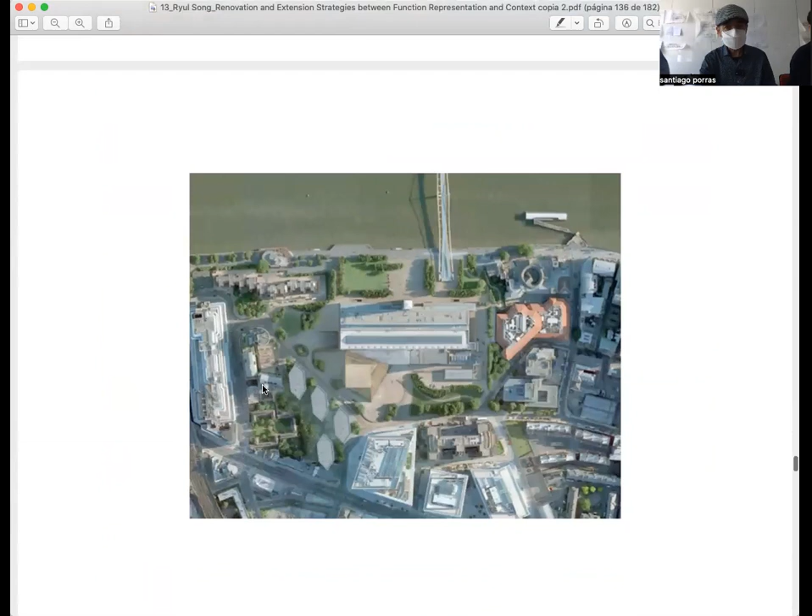Well, this whole history is really, really huge industrial space. When you reach those buildings, those spaces are imposing, and it's very hard to think what to do with it. So one good choice is: okay, we keep the huge space, which is monumental, and then it just connects to smaller experience spaces in the service areas on the sites.

Again, as in the Franciscan building in Seoul, but a little more elegant—a glass extension, glass box with a very expensive unitized curtain wall system. Everything is expensive with Herzog and de Meuron, right? And also surely this is a carved new opening to have more access, keeping the scale, but making a big effort in a very heavy building.

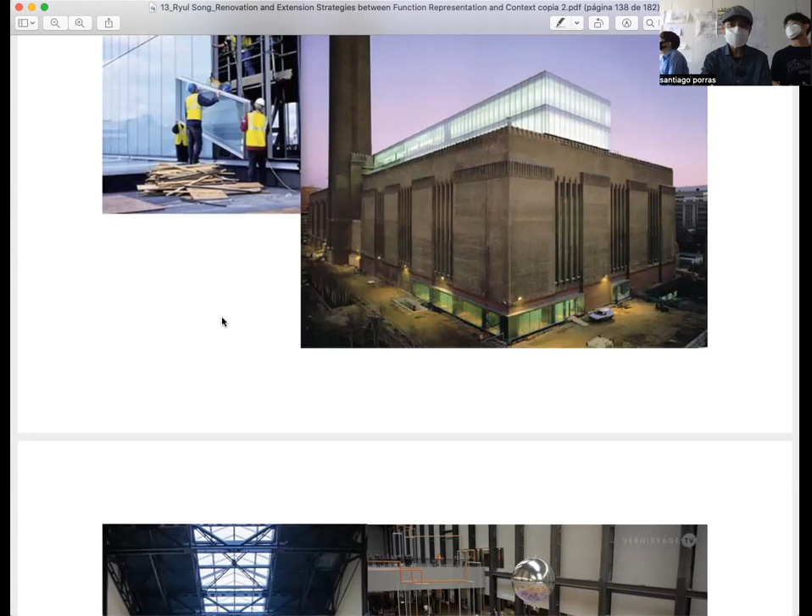Well, probably again, the merit is to keep the large space, so the industrial character doesn't disappear, with those ramps in which people sit and so on. This is a little bit in the middle, but here the scale is so huge that it's not the same as sitting in front of the door of a building at the entrance.

Well, this is different art installations, and this huge space allows for really huge artworks, or having the experience also with the material of the floor and so on. So the tactile experience is also important here. Herzog and de Meuron are very good with materials—usually they experiment a lot to push them to the limit.

The extension had many changes. It was controversial. It was huge, hugely expensive over time and so on. They kept the consistency of using the same kind of brick and then some geometrical line, and then some diagonal, creating a kind of focus toward the old building.

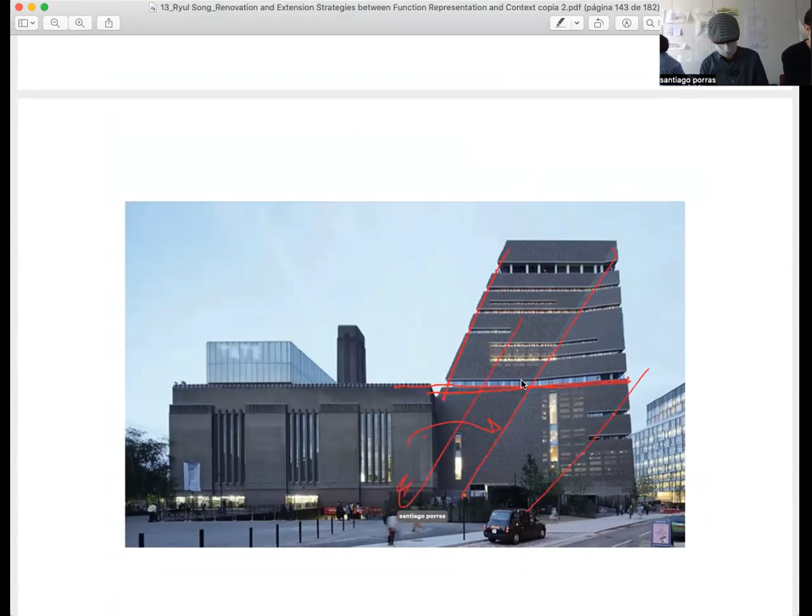But becoming, as we see in many examples, more free, more individualistic as you get away from the existing building—from just another box, which could be one of the boxes of the original building, to something totally new. Very difficult project, whatever. But again, this had so many changes that it's hard to know how the original idea here would have been.

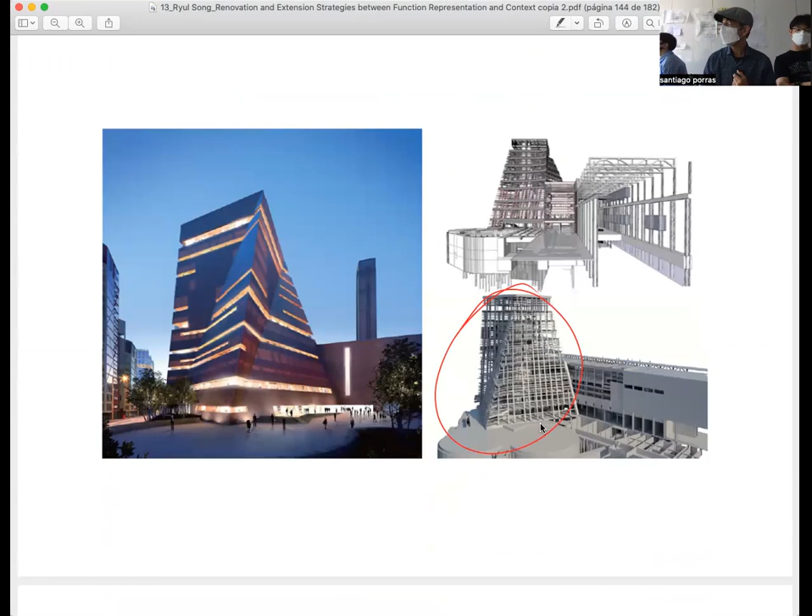As you're far away from the building, this is a very simple gesture, but a huge gesture. When we see the complication of the structure needed to make those things, we doubt a little bit on this being really appropriate or convenient. But this is something you can do in a monument, in a building which is really exceptional. It's not like everyday construction. So let's adapt on how much we should go over the logic just to make something monumental.

It's a question mark, but it works, so the structure works well. You have the diagram, which is very clear. So it's a huge space. Then you have all the existing spaces connecting, and then another secondary connection to the new building. And then a tertiary element to the city, a kind of urban open outdoor space.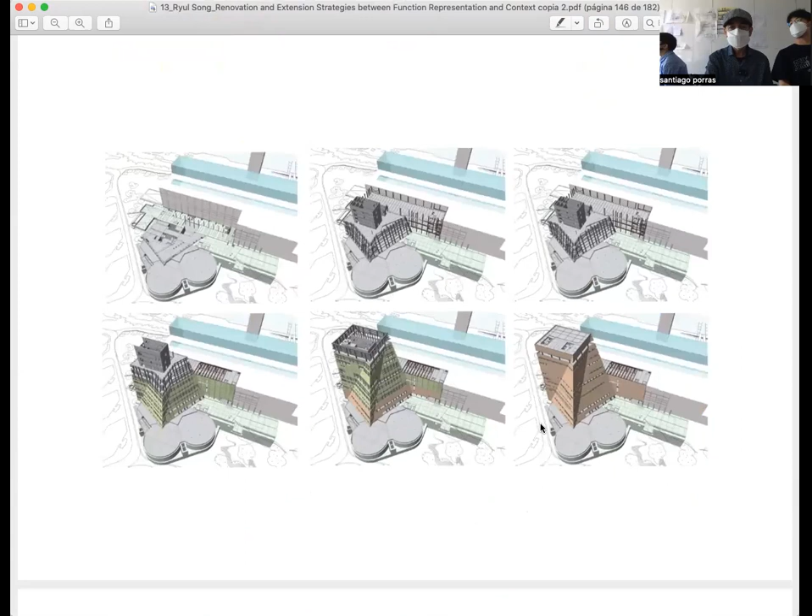This is the whole process of construction. The plan is also very nice to draw, but you see very clearly all the large lobbies and circulation spaces, which are very clear, very well connected. And then all the black is just the smaller rooms and the more functional spaces.

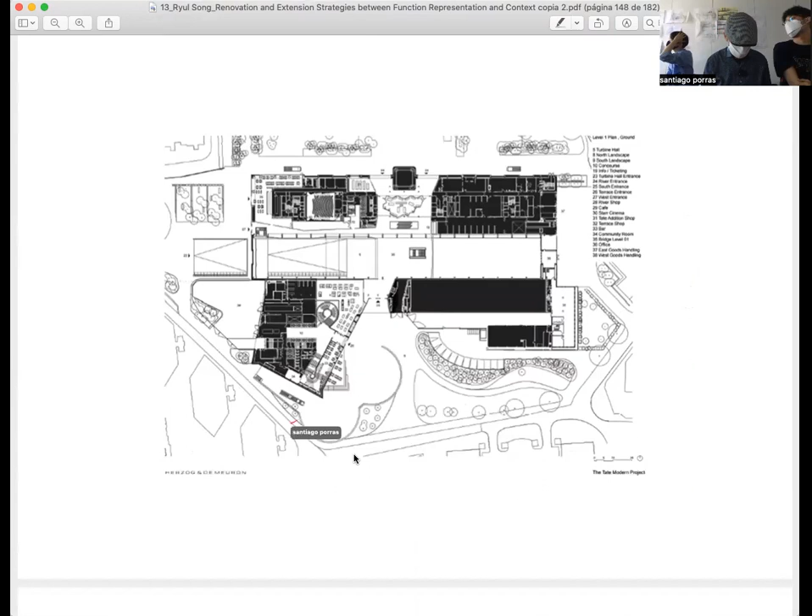This is the upper floors. Again, you see how the diagonal allows for a nice garden. In this case, see how the other diagonal doesn't follow the street. This is what we insist on often: you don't need to follow the street lines always. The context may suggest some gesture, but you may tweak it in some way to make it a bit more dynamic or to give it more tension. So you give it some independence from something random like a street.

See how, for example, the entrance, which is classical and very formal, very symmetrical, has a kind of response in the extension, but then it breaks the symmetry. So there's a connection, but also differentiation between the two blocks. Again, you can spend hours looking at those buildings.

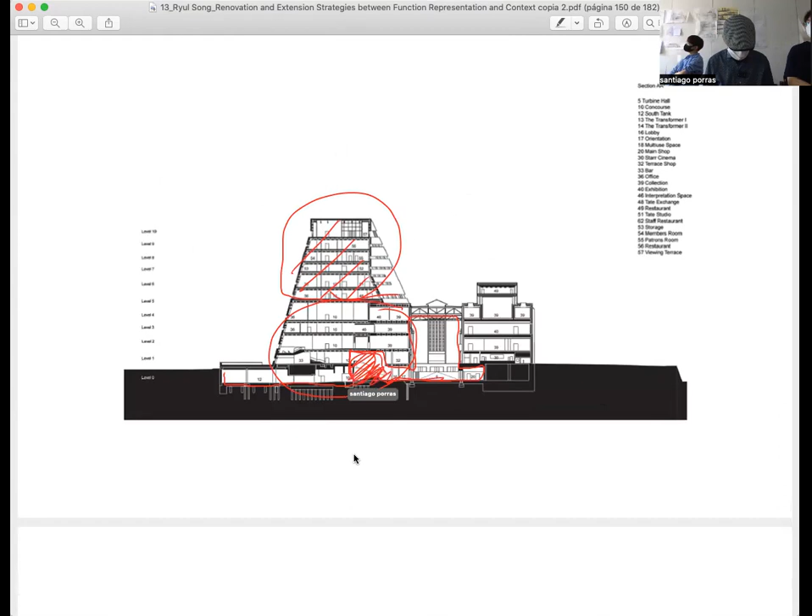And then as you go up, things become a bit more simple. This is the section. Probably up to some floor it's more administration, a more plain space, and the exhibition goes in the lower parts. Interesting in the section is the connection of those spaces, how they always have a large space, hubs which will distribute you to other areas.

A secondary section, the program. Again, this is the result of the program. You can draw a program like this, but to do this you have to have at least the clear final definition of the program, which many of you still do not have. Cannot believe it. Well, stairs—this is already the design, the huge elements in the big voids in the buildings.

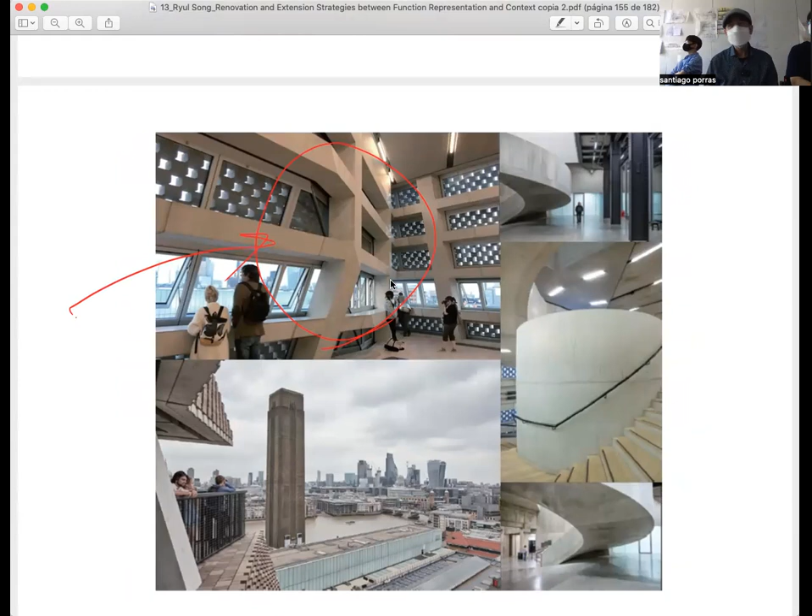These photos show you the complication of those structures. This works, but there's a huge cost, a huge effort, not only material and money, but in terms of engineering and study, with the brick on the exterior being an added difficulty. There's been a lot of controversy over the opportunity of doing this, or being a bit more humble in terms of formal definition.

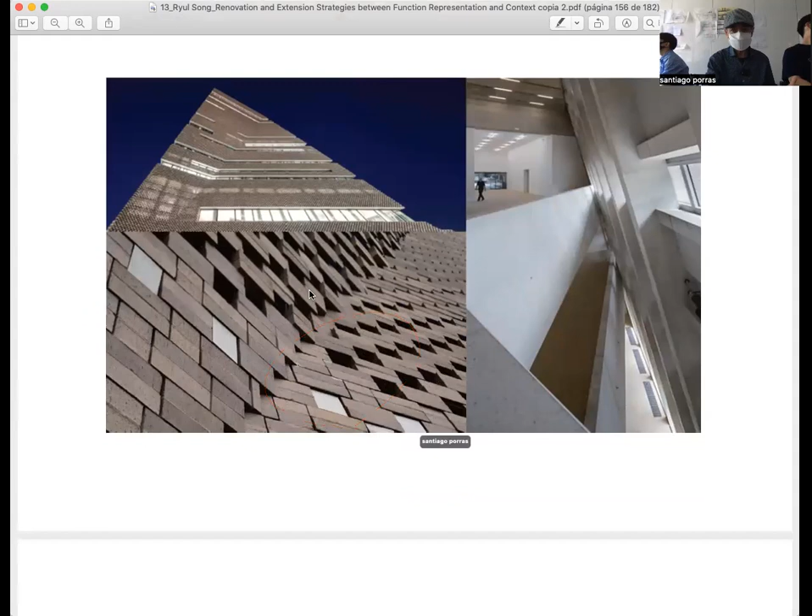So this is the brick detail. Actually, it's oversized brick because the walls are very big and they need a lot of steel connections, and there are hours and hours of construction. It looks great, but it's really a work of engineering to hold those bricks on the facade. I don't know how many engineer hours were put into making sure this works, how many mock-ups they had to do. The result is spectacular, no doubt.

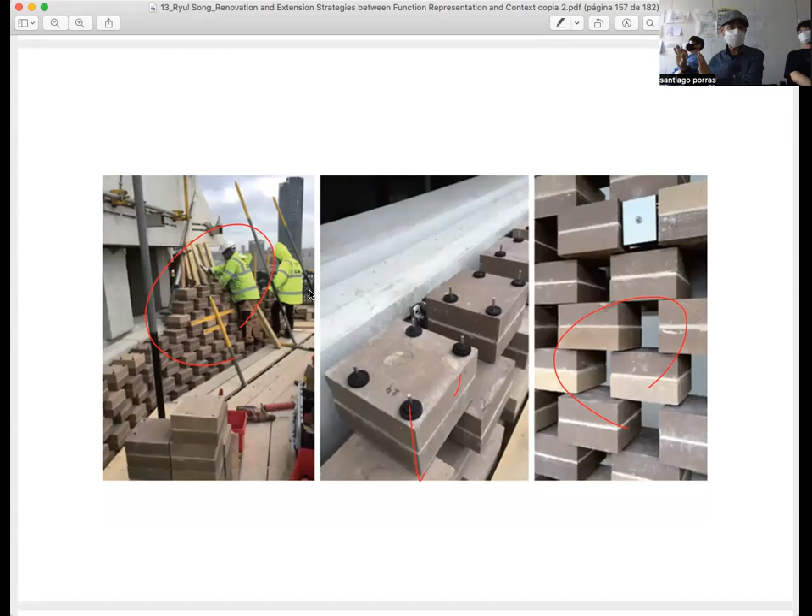But if you want to do this kind of thing, which is possible, you know what you have in front of you. In this huge scale, that endless perforated brick layer is the impossible but built. Next spaces—night photos are always flattering.

This is again Enric Miralles, an extension which was built. You have the original building, then the extension, which is quite strange. This is the opposite of Zumthor. Zumthor is minimalistic, having something precious. This is like a horror vacui—everything is filled with things around. It's like a pure passion.

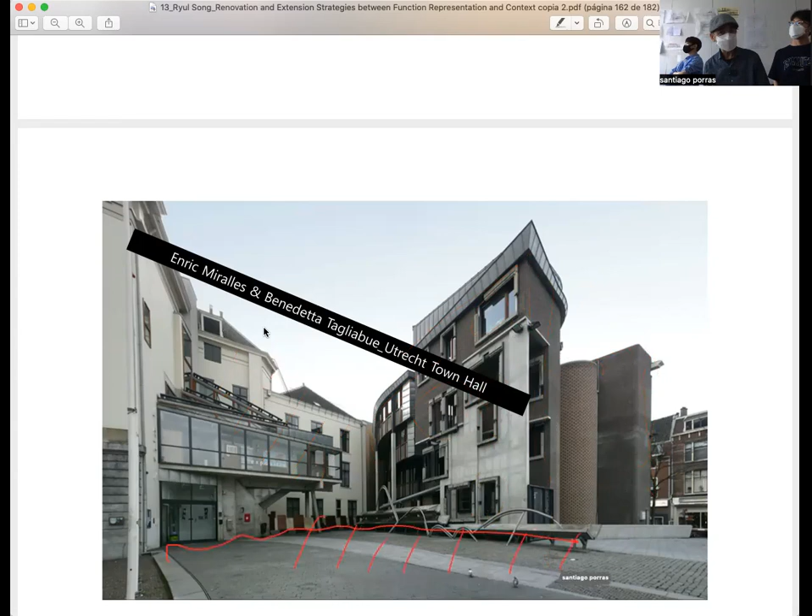All kinds of redesigned Baroque windows, Dutch windows made modern, with concrete, with brick, with large glass, with small glass, vertical, horizontal, organic, formal—everything is here. But the merit here is creating an urban space in the back, which is quiet and, according to them, pleasant. I have to say this, so I cannot say otherwise.

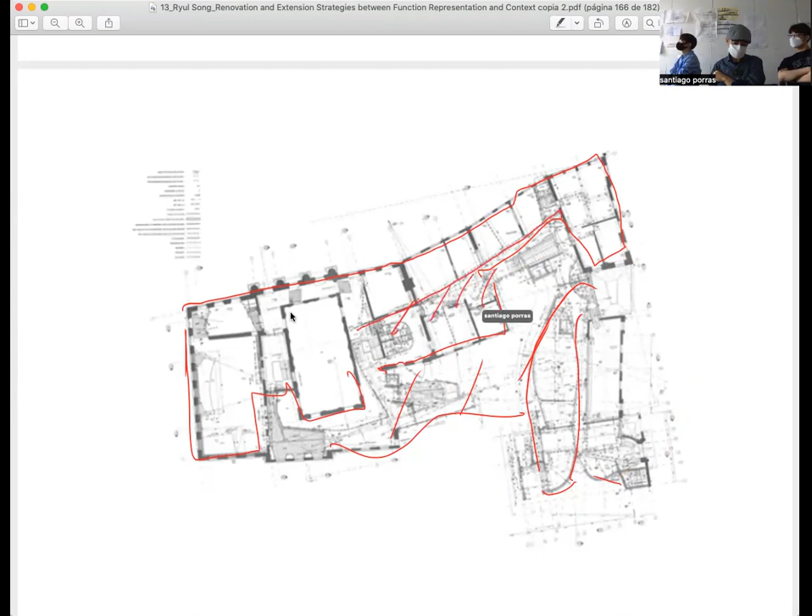That's okay, very architectural. The existing building, this is Old Town, is very organic. So the city is very regular. And the extension is very tiny compared to the existing building. So it's really secondary. But differently than Libeskind, you see that the interior space follows this kind of flow of extensions. So there's much more interaction between new and old, as we saw in the previous museum project.

It looks very messy, but it's quite controlled. There's not so many gestures, and it has a lot of inspiration from the existing. You're going one step beyond and keeping the logic of the circulation, the movement, the square, which kind of invites towards the entrance, has some kind of depth, right? Which connects very well with the other side, and so on. So the extension and the existing are totally different languages, but they match very well to each other.

The existing building is very heavy, the extension is much lighter, right? The rooms are rectangular, kind of, or trapezoidal. The new ones are a bit more fluid, right?

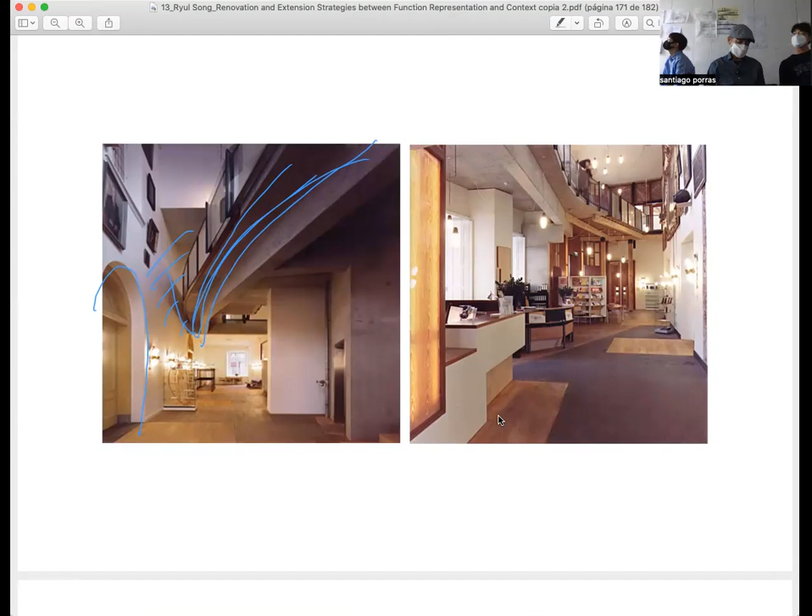And interior, curiously, is quite gentle. It's not so much complicated, and we can see very clearly the new elements. There's always this tension, touching, not touching, the formal arches for construction and the other more free arches for the new space and so on, right? So the new and old work quite well. Again, you have concrete, you have plaster, you have timber, you have glass. It's too much, but here it works because everything is very well worked out, right?

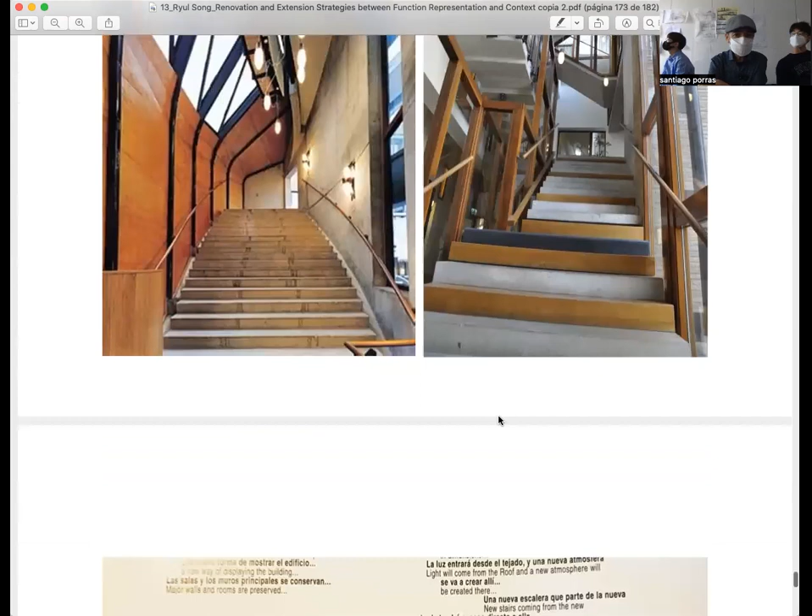What is the main meeting spaces, structure, the section. If you see the drawings, actually, they are quite logical. They are not so strange. And since you will have the handout, you might spend some time drawing over those sections because most of you are doing the kind of glass additions around, and it's not easy, right? And those are quite wise. It's not just the contour of these additions you make, but also how you modulate the glass and the structure which supports those elements in between.

Well, this is the photos. If you see the context, the building actually works quite well. It's kind of old buildings, like an artificial ruin there, in which the main buildings keep their own materiality, their own presence without any kind of aggression. This is why you see this is one of the most expressionistic extensions we have, but they're always so respectful with the existing building, right? It's just like accompanying it, giving it a new function, enhancing it, but never trying to compete or to make a huge change.

In case of the student club here, that's a different case, right? Because this very plain building has not such a history, such a significance. But when we have nice buildings, unless we make them much better, there's no need to start over destroying things more than necessary. Okay, this is some of the visions.

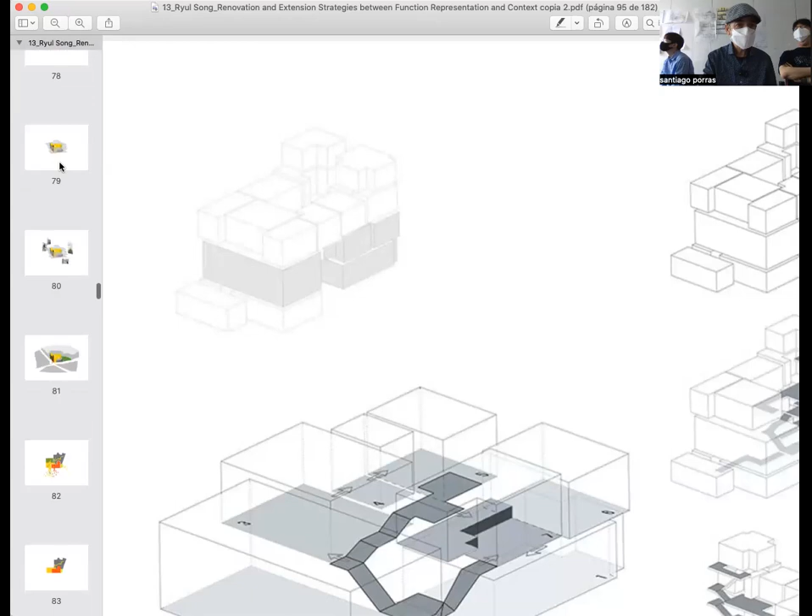Well, it was one of the drawings around there. Yeah, here, right? So this is expression, but...

and getting air and view. And it has to do with the context. So you see that in Cologne, you always see the towers of the churches around. It's giving this kind of a very quiet, very plain, but still one more landmark. So I think it works in two directions.

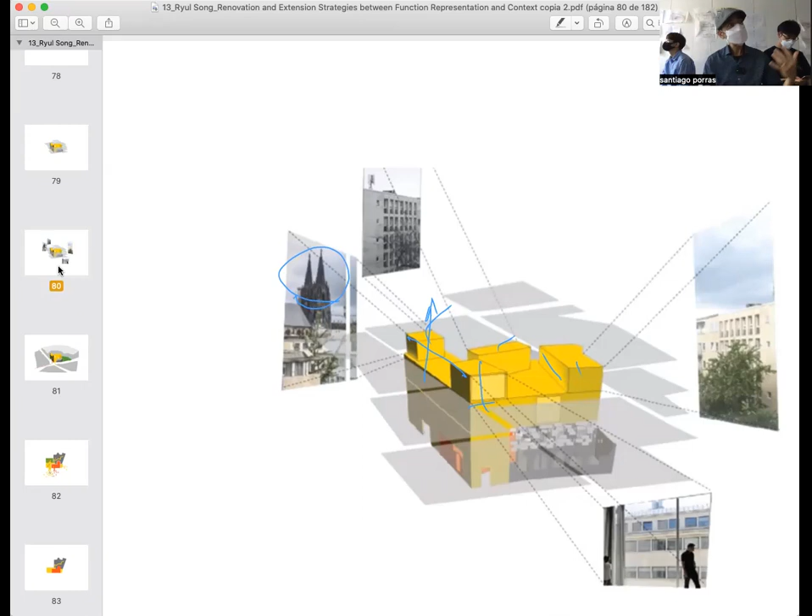So many things you can say about those buildings. The important thing is that there's an intention to have some visual connection, and it is clear at some point, so people understand what it's up to. Then we can go to the building. We might disagree, or might agree, or might think it was successful, or we might think we can do better.

Okay. I don't know if that replies your question. Okay, good. More questions?

Yes, about the last slide. I'm really curious: do you think Korea actually can change the pattern of making the apartment? Because they build it in literally 2 years, huge complexes. They do it really fast. Do you think that they will?

I have been asking myself that question for 14 years since I started teaching here. And I think eventually it will have to change. I'm surprised it keeps going on, right? Because the population does not increase, but the construction pace is unstoppable. It's very hard to say the reason. I think the politics and economics has to do with it. It's not pure architectural, not architectural at all. It's not urbanistic, it's more how the economy is made.

Who holds the power in Korea, in South Korea? Who holds the power? Who's the real power of the country? Samsung, LG, Hyundai, Daelim, Kia.